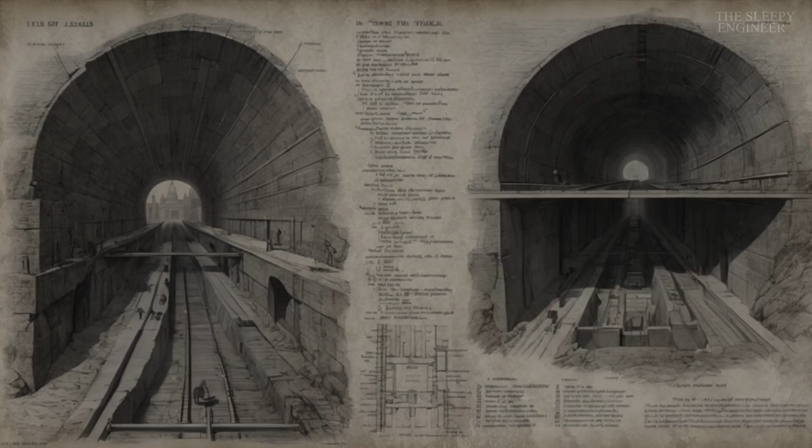the darkness below. The entire weight of our civilization, its commerce, its culture, its crushing physical mass, rests upon a hidden, horizontal world, an immense and intricate subterranean landscape that is arguably the single greatest and least understood engineering marvel of the modern age. This is the story of that world, the story of how we build the impossible passages that are the true arteries of the metropolis.

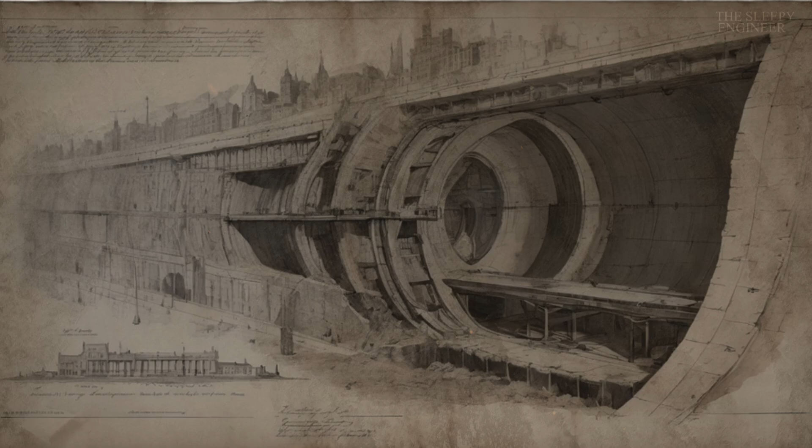The very ground beneath your feet is not the solid, dependable constant you imagine it to be. It is a membrane, a thin, carefully engineered skin, separating the chaotic life of the surface from the silent, high-pressure world of the deep earth. Through this membrane, we have threaded a network of passages of almost unimaginable scale and complexity. While you work in an office tower, a river of steel, a subway train carrying 1,000 people, may be gliding silently through the bedrock 100 meters below.

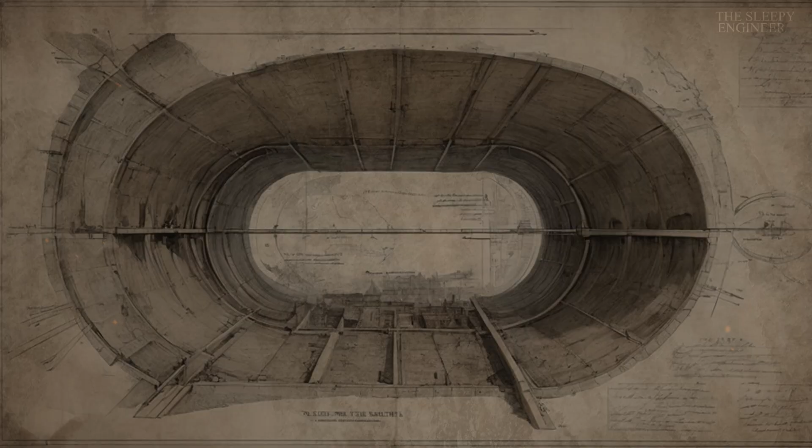While you sleep in your bed, a torrent of fresh water, the lifeblood of millions, is rushing through a concrete vessel wide enough to drive a truck through, its path charted through the earth with millimeter precision. We live our lives on the surface of a drum, blissfully unaware of the profound and thunderous work that is required to keep it from collapsing.

This is an exploration of how that work is done, not with magic, but with mathematics, geology, hydraulics, and brute mechanical force on a scale that borders on the unbelievable. We will journey down past the familiar layers of asphalt and concrete and into the earth itself, to understand the science, the risks, and the sheer audacity of modern urban tunneling.

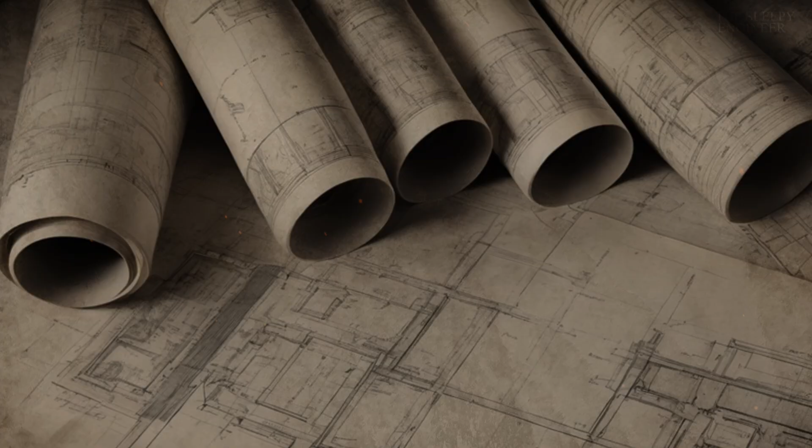Our descent does not begin in soft earth, but in a dense, man-made archaeology. The first few dozen meters beneath any major city are not a natural geology, but a chaotic landfill of its own history. Here lie the ghosts of forgotten infrastructure, crumbling brick sewers from the Victorian era, abandoned pneumatic mail tubes, stone foundations of buildings that no longer exist, and a tangled, uncharted web of old pipes and cables laid down by generations who kept poor records.

This is the first great challenge. Before a modern tunnel can even begin its journey, its path must be cleared through this treacherous historical debris. It is a painstaking process of mapping the unknown, of using ground-penetrating radar and carefully drilled boreholes to create a three-dimensional image of the unseen obstacles. It is less like construction and more like performing a delicate, high-stakes surgery on the city's past.

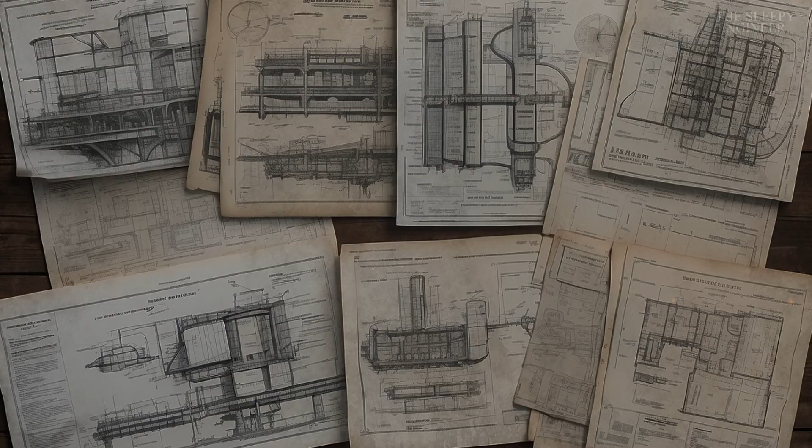Deeper still, we leave the realm of human history and enter the realm of geological time. Here, the challenges are more fundamental and far more powerful. The ground is not a uniform homogeneous substance. It is a complex layer cake of different materials, each with its own unique and often malevolent personality. There are layers of soft, waterlogged sand waiting to liquefy and flow into any new opening with the force of a tidal wave. There are pockets of hard, abrasive granite, capable of grinding the most powerful steel cutting tools into dust. And there are beds of stubborn, sticky clay, which can clog and suffocate even the most advanced digging machines.

Most dangerous of all is the water. The earth is saturated with it, and this groundwater is often under immense pressure. The single greatest fear of the tunneler is a breach, an uncontrolled inflow of water and earth that can lead to catastrophic collapse, not only of the tunnel itself, but of the very surface of the city above.

To conquer this high-pressure, unpredictable, and completely invisible world, we have conceived and built one of the most extraordinary machines on the planet. It is not merely a digger, it is a self-contained subterranean starship, a mobile factory designed to navigate the hostile environment of the deep Earth. This is the tunnel boring machine, the TBM.

Its scale is difficult to comprehend. A machine that can be over 150 meters long, weighing in excess of 4,000 tons. At its front is the cutter head, a massive rotating steel disc, bespoke for the geology it will encounter, armed with an array of hardened steel discs and tungsten carbide scrapers that spin with enough torque to pulverize solid rock into something that can be transported.

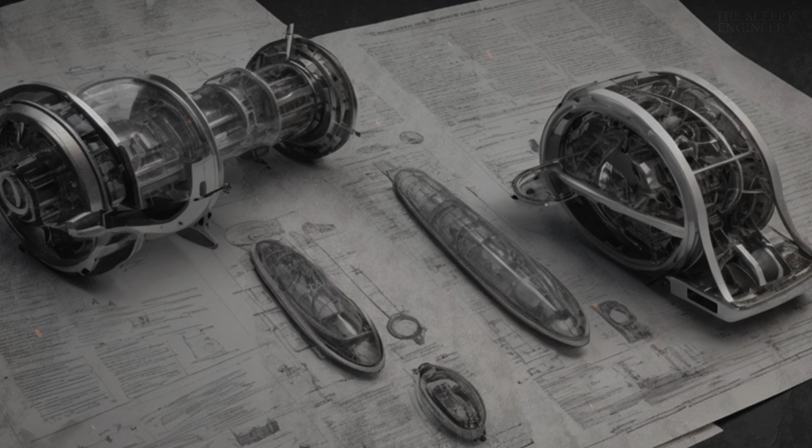They pore over historical photographs, searching for visual clues of a forgotten quarry or an old industrial waste site that was filled in and built over 100 years ago, now existing as a hidden pocket of soft, unpredictable, and potentially toxic material. Every piece of information, no matter how obscure, is a vital clue. Another small pinprick of light in the immense darkness of the unknown. They are building a case file on the Earth, cross-examining its history to understand its present-day temperament.

Once this historical tapestry has been woven, the physical investigation begins, often in the dead of night to avoid disrupting the city's rhythm. Small, unassuming drilling rigs are brought onto the streets and sidewalks along the proposed tunnel route. From these positions, they begin to pierce the veil, drilling a series of boreholes deep into the ground. These are not just holes, they are precise surgical incisions designed to extract physical evidence.

As the drill advances, it brings to the surface long cylindrical cores of soil and rock, perfect cross-sections of the subterranean world. To the trained eye of a geologist, these cores are like a library of deep time. They reveal the story of the Earth in vivid, tactile detail. The sharp, clear line separating a layer of dense, reddish clay from a stratum of pale, fine-grained sand. The cool, solid heft of a piece of granite, its crystals glittering under the work lights. The damp, musty smell of earth that has not been touched by air for millennia.

Each core is meticulously logged, photographed, and sealed in protective tubes, its exact depth and location recorded with GPS precision. Dozens, sometimes hundreds of these boreholes are drilled, each one a vital data point in the slow and patient process of mapping the abyss. These extracted cores are then transported to a geotechnical laboratory, a place where the Earth itself

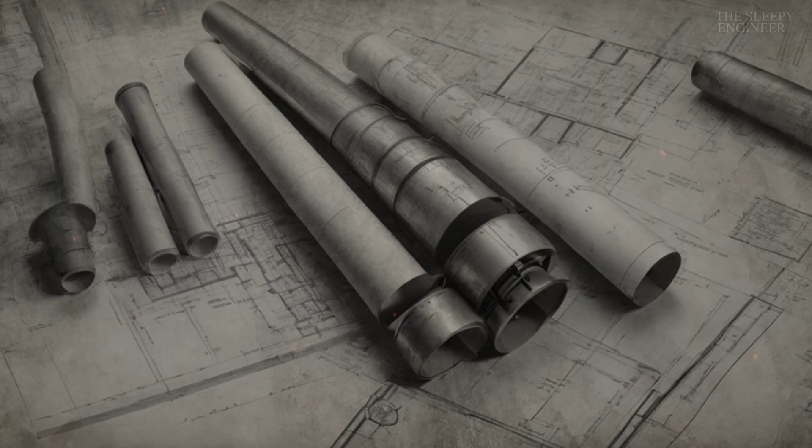Soil samples are analyzed for their particle size, their plasticity, and their moisture content, which dictates how they will behave when excavated. Will they be stable, or will they flow like liquid? Other samples are subjected to permeability tests, where water is forced through them under pressure to determine how easily the groundwater will be able to invade the tunnel.

The abrasiveness of the sand and rock is measured to predict how quickly the brutally expensive steel cutters on the TBM will be worn down and need replacement. Even the chemistry of the groundwater is analyzed to check for corrosive sulfates or chlorides that could, over the span of a century, eat away at the concrete and steel of the finished tunnel lining.

While the boreholes provide deep, vertical snapshots of the ground, the spaces between them remain a mystery. To fill in these gaps, engineers deploy a range of sophisticated, non-invasive techniques, a field known as geophysics. They conduct seismic surveys, laying out lines of sensitive microphones on the surface and then creating a small controlled vibration, often from a specialized heavy truck.

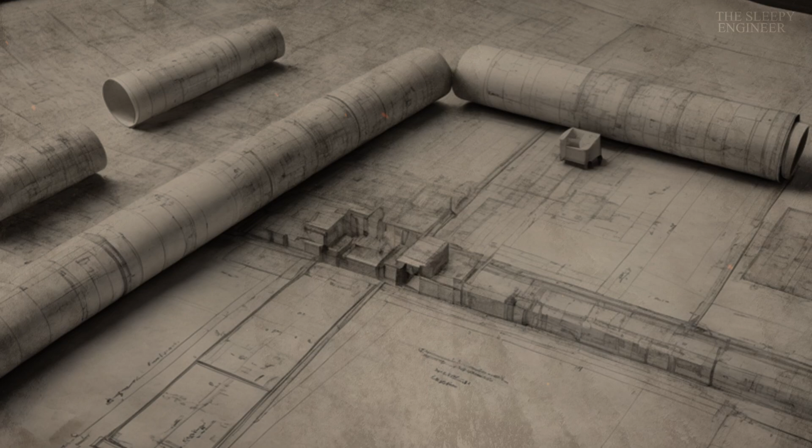By measuring the time it takes for these sound waves to travel down, reflect off different geological layers, and return to the surface, they can create a blurry but continuous ultrasound image of the rock strata. They use electrical resistivity, passing a current through the ground between two probes. Since water-saturated soil conducts electricity far better than solid, dry rock, this method allows them to map out the location of potentially dangerous underground aquifers and water pockets.

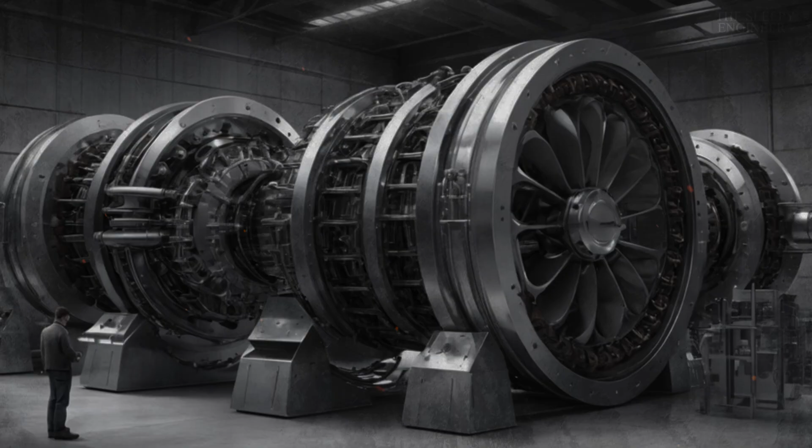This combination of high-tech remote sensing, akin to giving the city a CT scan, allows the engineers to build a more complete, holistic picture of the challenges that lie in wait, turning a series of disconnected data points from the boreholes into a coherent and continuous map. The final result of this long and multifaceted investigation is the creation of a ground model, a comprehensive, three-dimensional digital twin of the subterranean world through which the tunnel will pass.

All of the disparate data streams, the historical maps, the hundreds of borehole logs, the thousands of laboratory test results, and the geophysical surveys are fed into powerful computer software. The result is a stunningly complex and detailed virtual reality, a block of the Earth that engineers can digitally fly through, examining every layer of rock, every pocket of sand, and every potential water hazard from any angle.

They can use this model to run simulations, predicting how the ground will shift and settle as the tunnel is excavated, a phenomenon measured in millimeters that can have a profound impact on the buildings on the surface. This digital model is the single most important document in the entire project. It is the tunneler's Bible, the grand strategy map that will dictate every major decision to come. It transforms the unknown hostile abyss into a known, quantifiable, and ultimately conquerable environment.

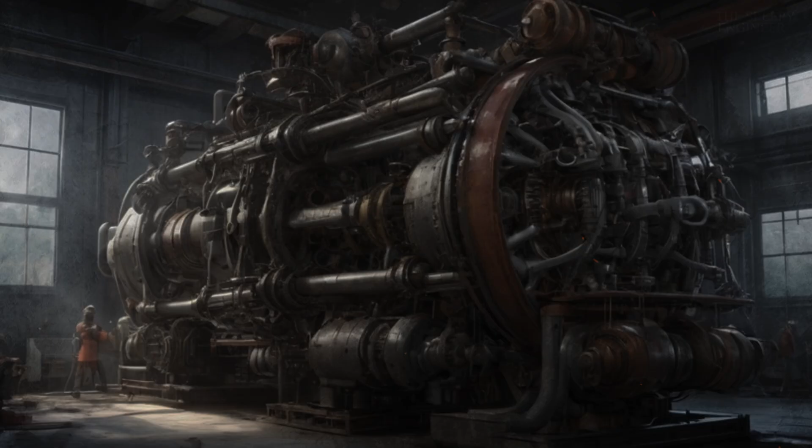In other cases, they may use grouting, a process where a specially formulated concrete-like slurry or a chemical resin is injected into the soil under high pressure, filling the voids between the grains of sand and soil, and effectively turning the weak ground into a solid, stable mass. This is engineering at its most elemental, the power to transform the earth to suit our needs.

With the invisible battlefield now fully charted, its hidden dangers exposed, and its weakest points artificially strengthened, the silent war of intelligence is over. The stage is now set for the first great act of physical creation to begin. The plans are finalized. The path is clear. But this first act is not the boring of the tunnel itself. It is the construction of its birthplace.

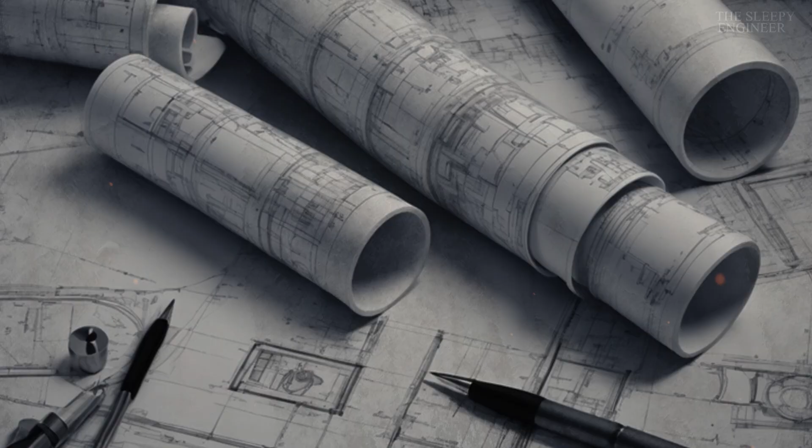A colossal reinforced concrete cavern must be excavated deep within the earth, right in the heart of the city, to serve as the assembly chamber and launch pad for the tunnel boring machine. This structure is the portal, the gateway to the deep earth, and it presents its own immense challenge. How do you dig a hole the size of a small cathedral in the middle of a congested metropolis, surrounded by skyscrapers and saturated with groundwater, without everything on the surface caving in?

The answer to how you dig a hole the size of a cathedral in the heart of a city is one of the most elegant and counterintuitive truths in all of modern engineering. You do not dig a hole at all. To simply excavate a vast open pit in the soft, saturated, and unstable ground of an urban center would be to invite immediate and catastrophic collapse. The immense, unseen pressure of the surrounding earth and water would surge into the void, undermining the foundations of nearby skyscrapers and turning the streets above into sinkholes.

Instead, the problem must be approached with the meticulous foresight of a grandmaster playing chess. The walls of the great cavern must be built first, materialized deep within the earth as if by magic, forming a fortress against the planet's pressure before a single significant shovel of soil from within that fortress is ever removed. This is the great secret of urban excavation. To conquer the void, you must first construct its cage.

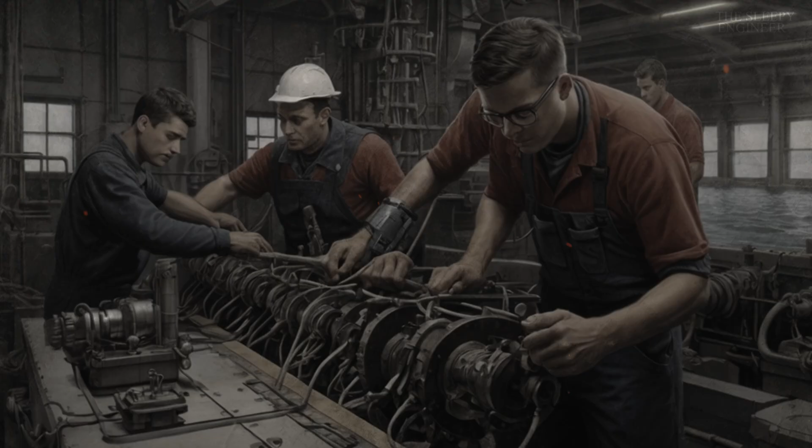Teams of specialized surgeons of the street must carefully excavate, cut, and divert massive water mains, high-pressure gas lines, critical sewer trunks, and the fragile, indispensable bundles of fiber optic cables. Each one of these systems must be rerouted around the perimeter of the future launch box, a process akin to performing a complex bypass surgery on a living patient, all while ensuring that the city's circulation is never interrupted.

Simultaneously, the site is armored for the immense construction to come. Acoustic barriers are erected to shield the surrounding neighborhoods from the noise, and sophisticated dust suppression and water treatment systems are installed. This is the slow, unglamorous, but absolutely vital prelude to the main event, ensuring the city can continue to function completely unaware of the immense operation being staged in its midst.

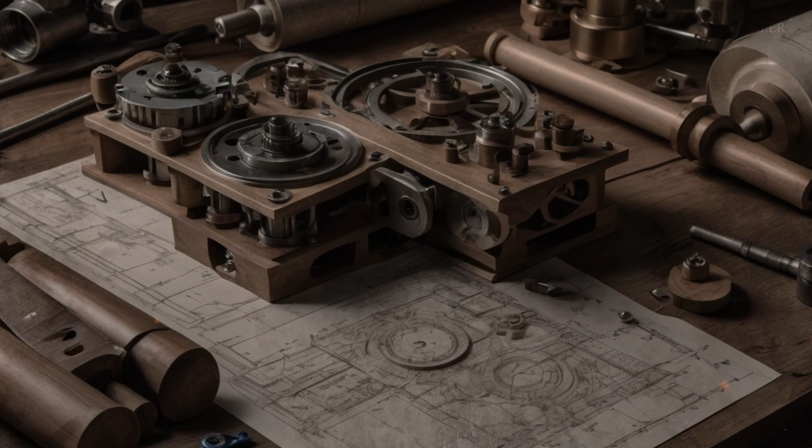With the site prepared, the construction of the unseen walls begins, often using a remarkable method known as diaphragm wall construction. Imagine a deep, narrow trench, perhaps only a meter or two wide, but plunging 50 or 60 meters into the earth. This trench is excavated not all at once, but in a sequence of discrete rectangular panels using a colossal, heavy-jawed mechanical grab called a clamshell. As this machine slowly and powerfully bites its way into the ground, the trench it creates is not left open to the air, where it would immediately collapse.

Instead, it is kept completely filled at all times with a thick, heavy, and viscous slurry made from a special volcanic clay called bentonite. The immense weight and density of this muddy fluid exerts a constant outward pressure on the trench walls, perfectly counteracting the inward pressure of the surrounding soil and groundwater, holding the excavation open with its sheer hydrostatic force.

Once a single panel is excavated to its full staggering depth, an immense cage-like skeleton of prefabricated steel reinforcement, weighing many tons, is lifted by a crane and slowly, carefully lowered into the bentonite-filled trench, sinking through the thick fluid until it is in its final position.

The final step in creating a single wall panel is an act of alchemical transformation. A long vertical pipe, known as a tremie pipe, is lowered to the very bottom of the slurry-filled trench inside the steel cage. Then, a specially designed high-strength concrete is pumped down this pipe. As the concrete begins to fill the trench from the bottom up, its immense density and weight displaces the lighter bentonite slurry, which is pumped out from the top and saved for reuse. This process continues for hours.

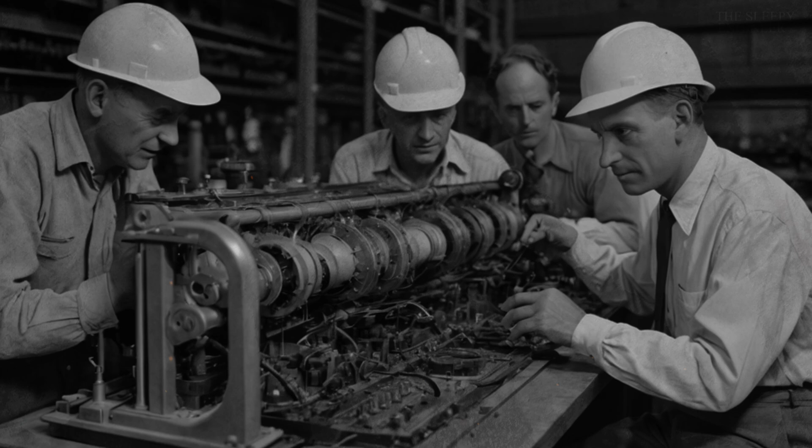These struts, some as thick as a person's torso, are themselves supported by horizontal steel beams called walers that run along the length of the wall. As the pit deepens, a dense, crisscrossing lattice of these enormous steel beams is installed, transforming the growing cavern into a stunning cathedral-like space of immense scale and complexity, a testament to the colossal, invisible forces being held at bay.

As the excavation plunges below the natural water table of the city, the battle against water begins in earnest. The completed walls are watertight, but the ground at the bottom of the pit is not. Water begins to seep up from below, under immense hydrostatic pressure. To combat this, a powerful dewatering system is engaged, a network of deep wells and pumps that constantly work to draw down the local water table, keeping the vast construction site remarkably dry.

Once the excavation reaches its final planned depth, the last major structural element is created, the base slab. This is the floor of the launch chamber, a massive solid slab of steel reinforced concrete, often many meters thick. This base slab must not only be strong enough to support the weight of the multi-thousand-ton tunnel boring machine, but it must also be heavy enough to resist the constant, buoyant uplift pressure from the groundwater below, which is perpetually trying to push the entire concrete box up out of the ground, as if it were a boat.

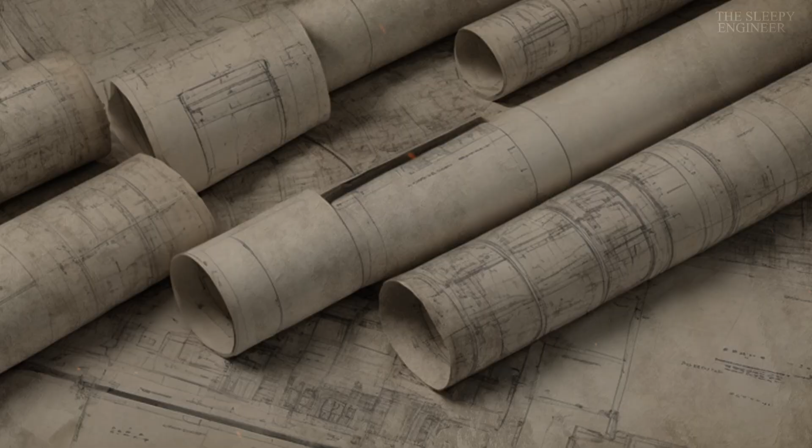When this final element is cured, the work is complete. Hidden deep beneath the traffic, the noise and the life of the city is a new and permanent place, a vast, silent, and cavernous concrete hall. It is a dry, secure, and structurally perfect environment, a pristine industrial cathedral, hundreds of meters long and dozens of meters deep, equipped with massive overhead gantry cranes that run along its length.

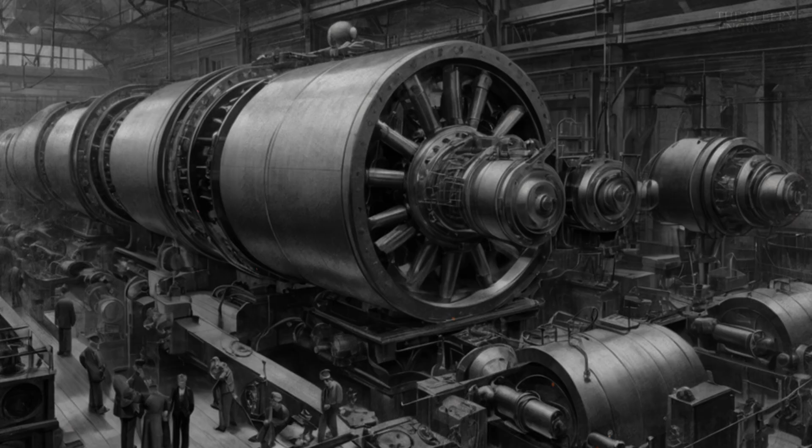It is the largest, most expensive, and most complex empty room in the entire city, and its sole purpose is to serve as a clean room, an assembly hall, and a launch pad for the Titan that is to come. The great void has been successfully carved from the heart of the city. The surgical theater is now prepped, scrubbed, and ready for the main operation. All that is missing is the star of the show.

The great concrete cathedral now lies waiting, a silent, empty space of immense potential, hidden from the world above. But its star, the tunnel boring machine, is not a single entity that arrives on a truck.

It is a colossal and incredibly complex machine that is forged in dozens of factories in different countries around the world, and which will arrive at the site in hundreds of individual pieces. The cutter head alone, a single disc of steel, can weigh over 100 tons. The main bearing, the component that allows the cutter head to rotate, is itself a masterpiece of precision engineering the size of a small house.

How then do you choreograph the complex logistical ballet of delivering these massive multi-ton components through the congested streets of a modern city? Lower them one by one into the deep earth with the delicate precision of a watchmaker, and assemble them in the correct sequence to create the single largest and most powerful mobile machine on the planet.

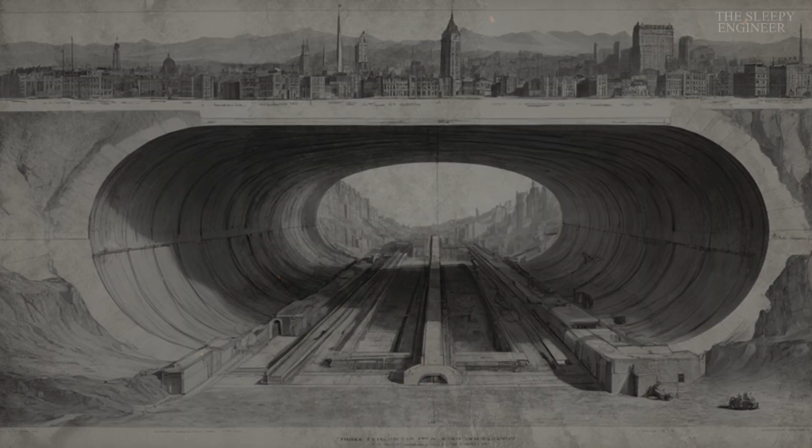This process is repeated hundreds of times, a slow and deliberate population of the void, each lift a potential point of catastrophic failure, each successful placement a small but crucial victory in the assembly of the giant. Down in the concrete quiet of the assembly chamber, the beast begins to take shape, and its assembly always begins with its heart and its skeleton.

The first pieces to be assembled are the curved, immensely thick steel plates of the main shield, the cylindrical body that will protect the machine and its crew from the crushing pressures of the earth. These sections are lowered, carefully aligned, and then joined together with hundreds of massive, high-strength bolts, torqued to a precise specification, to form the first solid rings of the TBM's body.

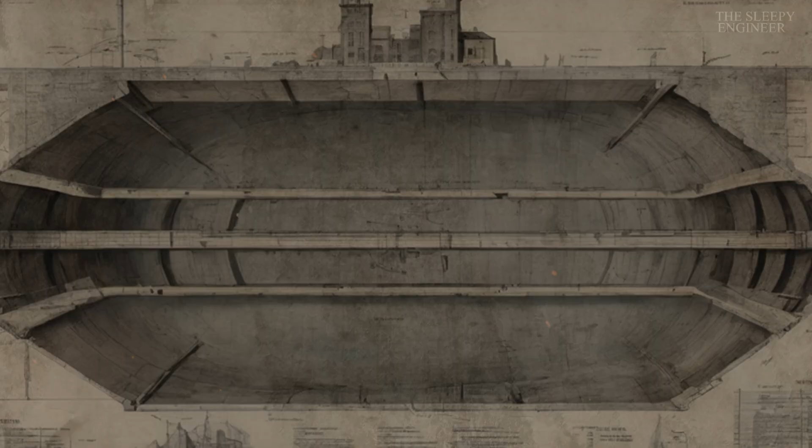Once this foundational structure is in place, the single most important, most expensive, and most precise component of the entire machine is installed: the main bearing. This is a colossal ring of perfectly machined steel, a masterpiece of metallurgy that can be 10 meters in diameter and weigh hundreds of tons. It is the heart of the machine, the component that will allow the cutter head to rotate against the immense resistance of the rock while bearing the full forward thrust of the entire machine.

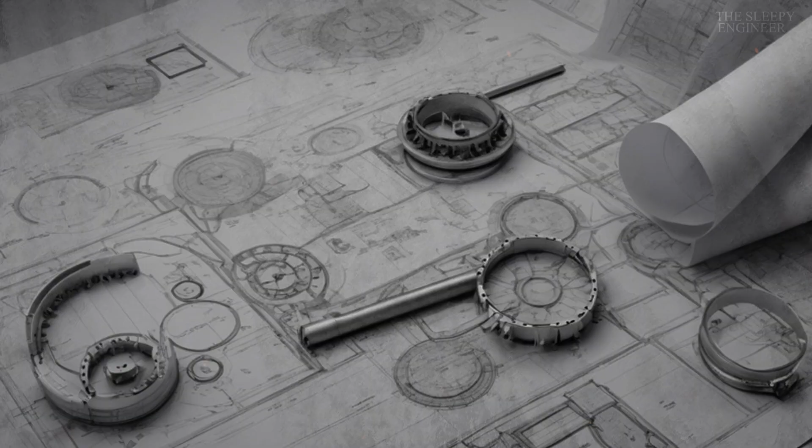Its installation is the most delicate and painstaking part of the entire assembly, a process that can take weeks, as it must be aligned with a degree of precision that is almost absolute, for any flaw in its placement would be magnified into a catastrophic failure once the machine begins to bore.

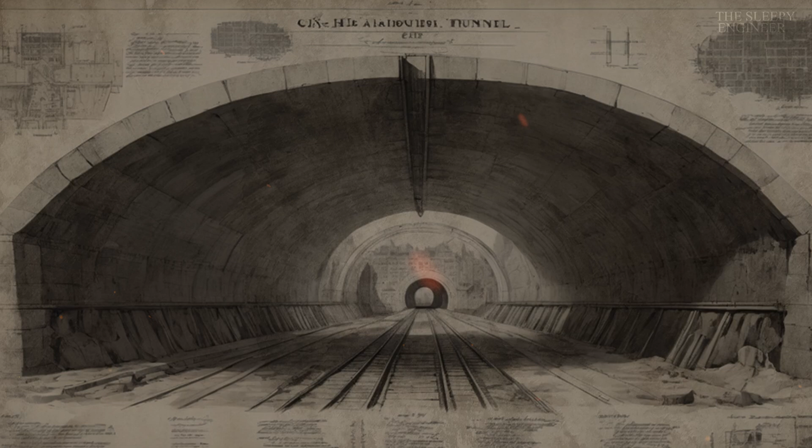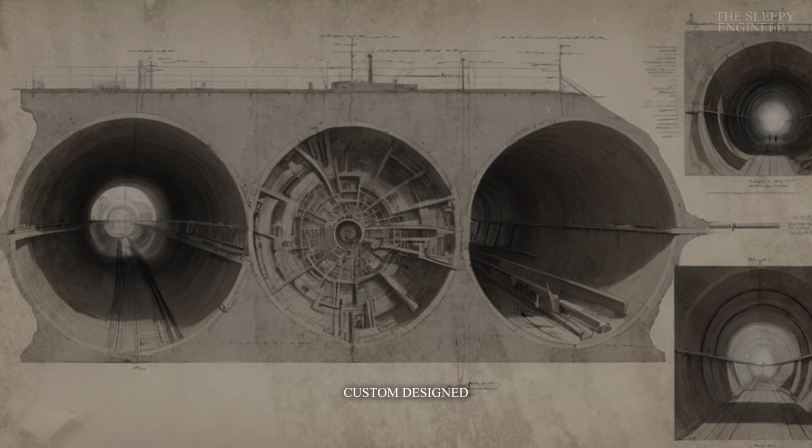With the heart of the Titan securely in place, the time comes to give the machine its face. The cutter head, the business end of the TBM, is often the last major component to be assembled on the surface, before being lowered into the pit. This massive steel disc, which has been custom designed for the specific geology of its journey, is laid out and its tools are installed. Dozens, sometimes hundreds of cutting instruments are meticulously bolted into place.

These include heavy, hardened steel disc cutters, designed to create high-pressure point loads that crack and fracture solid rock, and softer tungsten carbide scrapers and plows, designed to scoop away softer ground like clay and sand. When this immense armored disc is fully dressed, it is lifted and carefully rotated into a vertical position. Then, in the most dramatic moment of the assembly, the entire multi-hundred-ton cutter head is lowered into the launch chamber and painstakingly bolted onto the main bearing.

This is the moment of transformation. The collection of rings, motors, and hydraulic rams ceases to be a collection of parts and becomes a recognizable entity. A machine with a face, a purpose-built monster designed for a singular, relentless task: to consume the earth. A tunnel boring machine, however, is far more than just a rotating drill bit. It is a dense, complex, and self-contained ecosystem. And now its internal organs must be installed.

Deep within the protection of the main shield, a labyrinth of machinery is assembled. A ring of colossal electric motors, each the size of a small car, is installed and connected to the gearboxes that will drive the cutter head. The immense hydraulic power pack is put in place, a system of pumps and reservoirs that will power the rams that propel the machine forward, and the segment erector that builds the tunnel. The screw conveyor is installed, a massive Archimedes screw that sits directly behind the cutter head, designed to catch the excavated rock and soil, or muck, and transport it through the machine to the waiting disposal system.

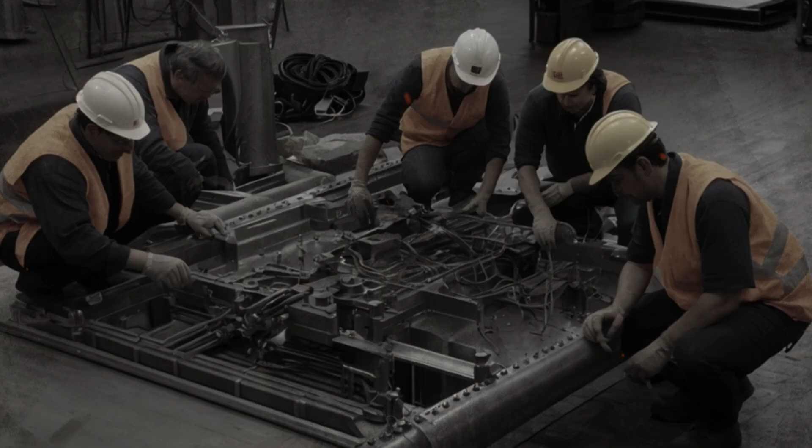This critical process, known as traversing the shaft, is one of the most difficult and skill-intensive tasks in all of tunnel surveying. The survey crew must transfer the coordinates of the surface control points down the immense vertical drop of the launch shaft with almost no loss of accuracy. They achieve this using a combination of techniques, often employing highly precise optical plummets or vertical lasers to project a perfectly straight line of sight from a known point at the top of the shaft to a new point being established on the floor of the launch chamber below.

This process is fraught with potential errors. The subtle movement of the air within the shaft, caused by temperature differences and ventilation systems, can bend the path of a laser beam. The slightest vibration in the surrounding ground can disturb the instruments. The surveyors must account for all of this, taking dozens of repeated measurements and using complex mathematical adjustments to establish a new set of control points deep in the Earth that are a true and perfect reflection of the network on the surface. Once this control network is established within the tunnel's starting chamber, the machine itself can be given its own set of eyes.

Mounted deep within the forward section of the TBM's shield is its primary guidance system, a sophisticated laser-based instrument known as an automatic tail shield laser system. At its heart is a robotic total station, a device that can automatically track and measure distances and angles with incredible speed and accuracy. This total station is aimed not forwards, but backwards, into the tunnel that has already been built. As the TBM moves, the total station continuously and automatically locks onto a series of reflective prism targets, which have been mounted at precise locations on the newly installed concrete tunnel rings.

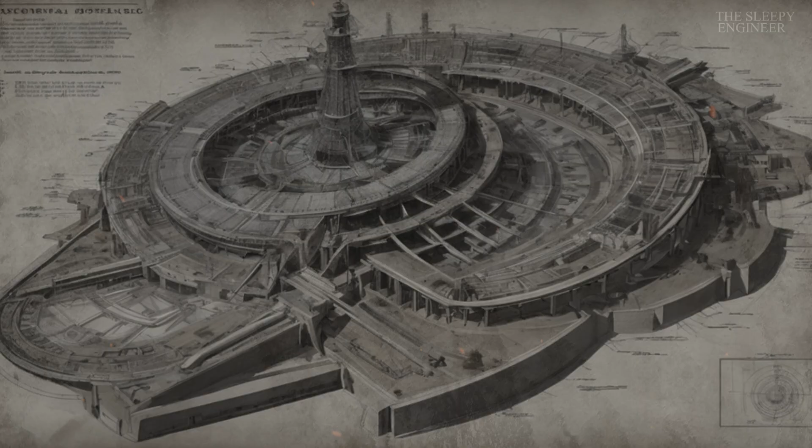The empty tube must then be given its organs, its nervous system, and its purpose. This is the final and most complex phase of the construction. For a subway tunnel, this involves the painstaking installation of the track bed, the laying of thousands of tons of ballast, concrete sleepers, and the two parallel ribbons of steel rail, all set to a precise and unforgiving geometry. For a road tunnel, this is when the road surface itself is paved, the curbs are installed, and the lane markings are painted. Then comes the vast and intricate web of mechanical and electrical systems.

Thousands of kilometers of high voltage cables are run to power the lighting, the signaling systems, and the ventilation fans. The ventilation system itself, with its colossal jet fans mounted to the tunnel ceiling, is installed to manage the flow of air and the exhaust from vehicles.

And finally, the critical life safety systems are put in place. The emergency walkways, the fire suppression pipelines, the communication systems, and the thousands of sensors that will monitor the tunnel's health for its entire operational life.

The single-bore tunnel, a perfect and pristine cylinder carved by a titan of steel and guided by an invisible web of lasers, is now a complete and functioning masterpiece of modern engineering. It is a testament to a process that is both brutally powerful and exquisitely precise.

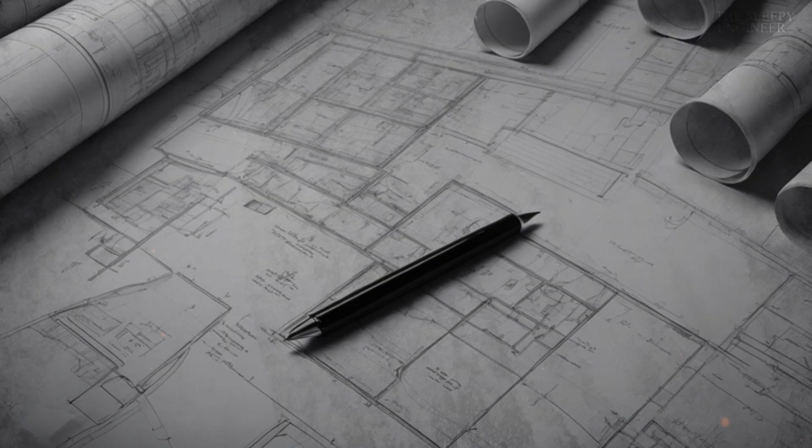A vast cavern is never excavated all at once. It is revealed in a careful and predetermined sequence of smaller excavations. The process typically begins at the very top, or the crown of the future cavern, with the excavation of what is known as the top heading. In softer ground, this is done with a roadheader, a powerful excavating machine with a large rotating cutting head, studded with tungsten carbide picks, which selectively grinds away the earth.

In hard rock, this is achieved through the precise and controlled use of explosives, a technique known as drill and blast, where a carefully calculated pattern of charges is used to break up a limited section of the rock face. The key to this first step is that only a small, manageable portion of the tunnel face is excavated at a time, typically for a length of only a single meter. This minimizes the area of unsupported ground, ensuring the natural stability of the rock arch is never compromised.

Immediately following this initial cut, and this is the most critical and time-sensitive step in the entire cycle, the newly exposed earth is given an artificial skin, before the ground has a chance to unravel or deform uncontrollably. A thin layer of a special, fast-setting, and high-strength concrete mixture called shotcrete is applied.

This is not concrete that is poured into forms. It is a dry or wet mix that is propelled at high velocity from a nozzle, directly onto the raw, contoured surface of the newly excavated rock and soil. This process, often carried out by a skilled operator guiding a robotic spraying arm, creates a thin, flexible, but remarkably strong initial lining that conforms perfectly to every nook and cranny of the excavation.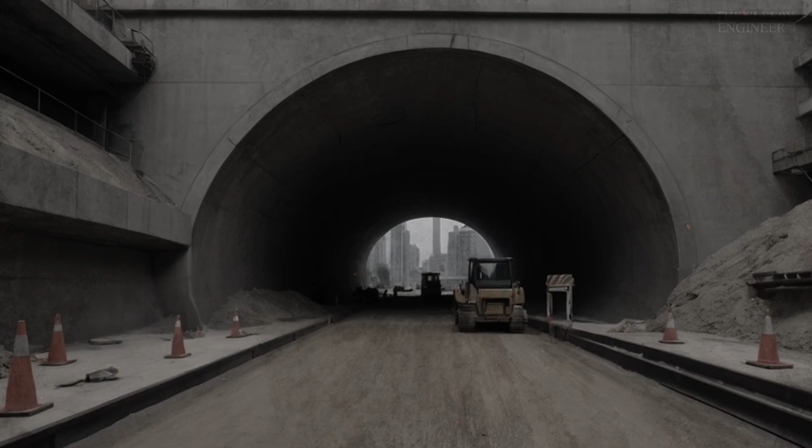Extensometers are placed in boreholes to measure, with microscopic accuracy, how much the different layers of rock are moving. Pressure cells are embedded in the shotcrete lining to measure the buildup of stress and load, and convergence bolts are installed across the tunnel, with their distance from each other being measured constantly by surveyors to determine how the cavern is deforming as a whole.

The data from these thousands of sensors is fed back to the engineering office on the surface and monitored 24 hours a day. This constant stream of information allows the engineers to listen to the ground to understand if it is behaving as their models predicted. If the ground is showing more stress or movement than expected, the support system can be adapted on the fly. The next layer of shotcrete can be made thicker, or the pattern of rock bolts can be made denser. This makes NATM a living, adaptive method, a true partnership between the engineer and the geology.

Only after the entire cavern has been fully excavated and the primary lining of shotcrete and rock bolts is deemed to be completely stable does the final stage of construction begin. The primary lining, though structurally sound, is a rough, uneven surface, and it is not designed to be perfectly waterproof. To create the final permanent structure, a comprehensive waterproofing membrane is meticulously installed.

This is a thick, durable, and flexible skin of a material like PVC, which is carefully welded and sealed to cover every square meter of the cavern's interior, creating an impermeable barrier that will prevent any groundwater from ever entering the station. Once this membrane is in place, the final, reinforced concrete inner lining is constructed.

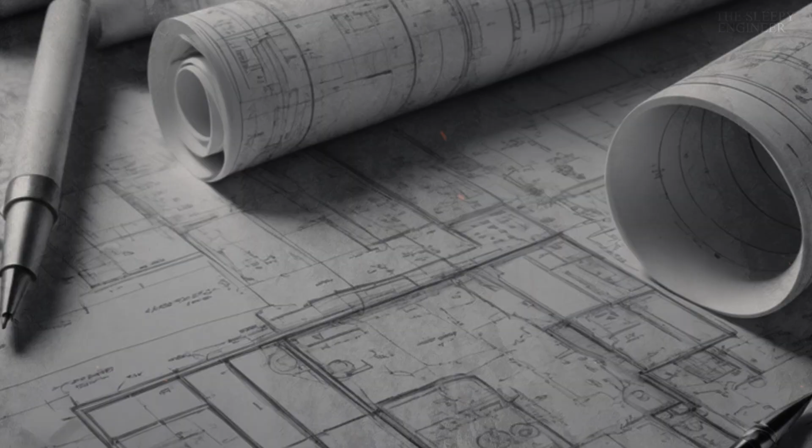This is the thick, smooth, and often architecturally expressive concrete shell that the public will ultimately see. This final lining is not just for aesthetics. It is the permanent, structural heart of the cavern, designed to be completely watertight and to bear the loads of the earth for well over a century.

The Great Sculpted Cavern, a bespoke space born from a harmonious and observational dance with the earth, is now complete. The new Austrian tunneling method has allowed engineers to create a complex, multi-level void, a feat of subterranean architecture that the relentless cylindrical march of the TBM could never hope to achieve.

But these two great philosophies of tunneling, the brute force shielded advance of the TBM and the delicate adaptive approach of NATM, are not always mutually exclusive, and neither can function without confronting one of the oldest, most powerful, and most unpredictable enemies of the deep earth, water.

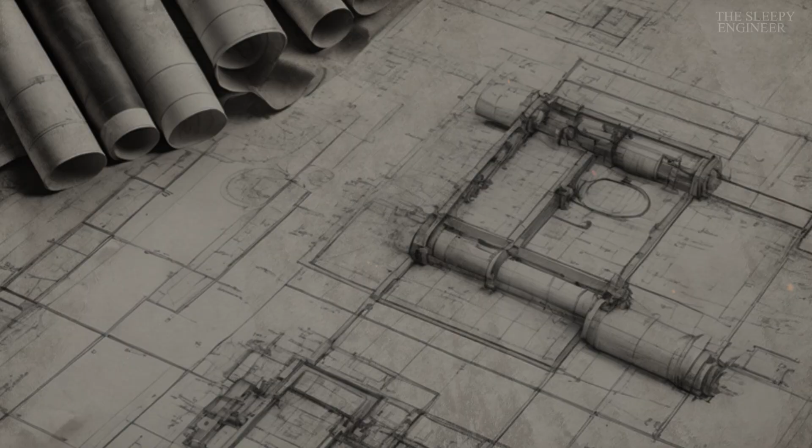What happens then, when the path of a tunnel must pass not just through damp soil, but directly beneath a massive flowing river, or even the open sea? How do we build dry, stable passages on the bed of a harbor, fighting against colossal hydrostatic pressures that threaten to crush, breach, and flood any structure in an instant? This requires moving beyond boring and sculpting into a world where tunnels are not dug but are built on the surface, and then deliberately and precisely sunk.

We have witnessed the relentless, forward-boring march of the shielded Titan, and the patient, sculptural craft of the observational method. Both are philosophies designed to conquer the solid earth, but we now arrive at a challenge of a different order of magnitude, an adversary that cannot be simply drilled through or sculpted away, a wide, deep, and powerful body of water.

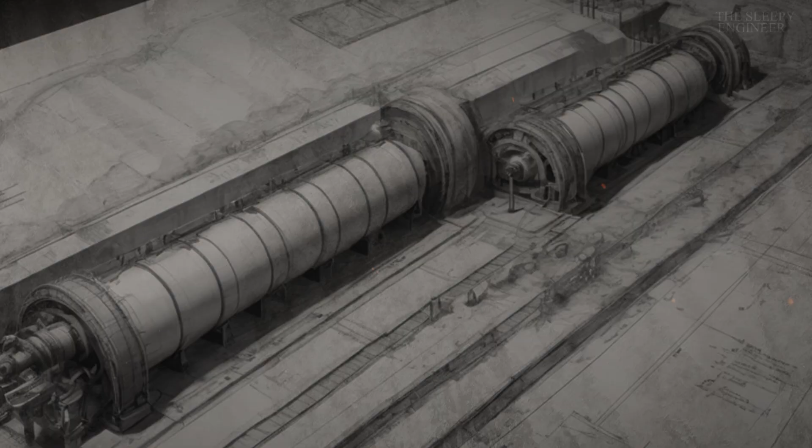When the path of a tunnel must cross a major river, a busy harbor, or a coastal strait, the geology of the seabed is often a treacherous mixture of soft, unconsolidated silts, muds, and waterlogged sands, often extending to immense depths. To drive a conventional TBM through such ground would be a perilous and astronomically expensive undertaking, fighting a constant high-pressure battle against mud and water.

To solve this seemingly insurmountable problem, engineers devised a solution of breathtaking audacity and lateral thinking. They conceived of a method that does not bore through the ground at all. Instead, it is a hybrid of naval architecture and heavy civil engineering, a method where the tunnel is not dug but is built, floated, and then deliberately and with immense precision sunk. This is the world of the immersed tube tunnel.

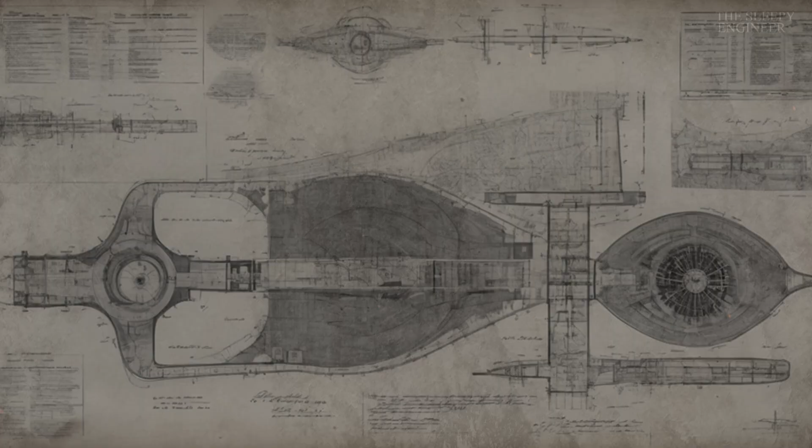The life of an immersed tube tunnel begins not in the water, but in a vast, purpose-built factory on dry land. This is the casting basin, or dry dock, an immense construction site, often located many kilometers from the tunnel's final destination, where the individual elements of the tunnel are forged. These are not small pieces. A single tunnel segment can be over 100 meters long, 30 or 40 meters wide, and 10 meters high, a colossal hollow box of heavily reinforced concrete or dual-walled steel, weighing as much as 50 or 60,000 tons.

Inside this dry dock, a factory-like assembly line is established to construct these behemoths. Immense movable formworks are erected, and a complex web of steel reinforcement is meticulously tied into place. Then, in a series of massive continuous pours, thousands of cubic meters of high-strength concrete are cast to form the segment's floor, walls, and roof.

At each end of these colossal concrete boxes, a critical feature is installed: a massive compressible rubber seal, known as a Gina gasket, and a temporary but immensely strong steel bulkhead that will, for a time, turn this piece of a tunnel into a seaworthy vessel.

When a series of these colossal segments is fully constructed and cured, the most dramatic and counterintuitive phase of their creation begins: the dry dock. A workplace that has been a hive of terrestrial construction activity for many months is prepared to be flooded. The massive sea gates that separate the casting basin from the adjacent river or harbor are sealed, and immense pumps are slowly switched on, filling the basin with millions of gallons of water. With agonizing slowness, the water level begins to rise.

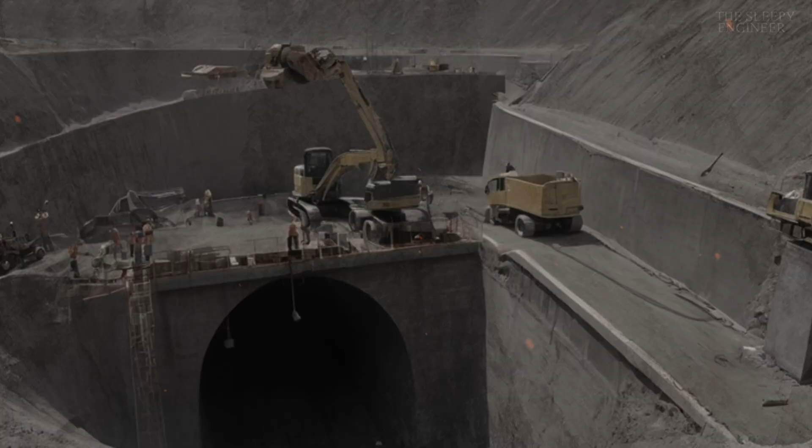The tunnel segments, each as massive as a naval destroyer, are now floating, transformed from static structures into immense rectangular and strangely graceful vessels, waiting in their temporary lagoon for the next stage of their journey. That journey is a slow and majestic procession, a carefully choreographed naval operation.

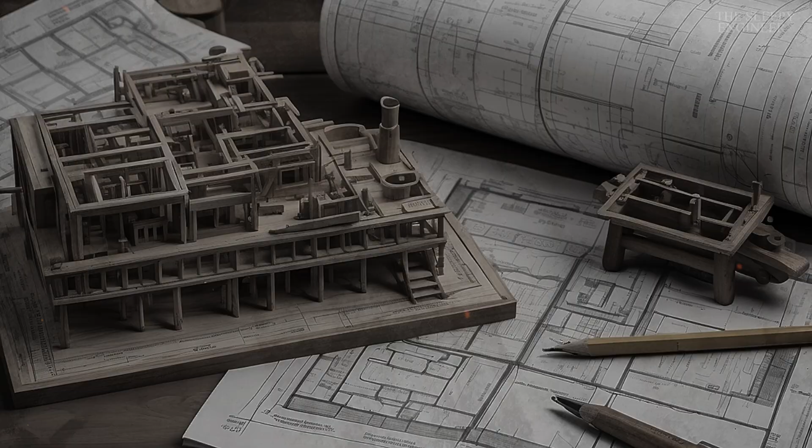A flotilla of powerful tugboats enters the now flooded dry dock and is carefully secured to a single floating tunnel segment. Then, the sea gates are opened and the segment is gently nudged out into the open waterway. The process of towing this immense, unwieldy, and almost shapeless object to the final tunnel site is a painstaking exercise in navigation and seamanship. The segment has a huge surface area, making it vulnerable to winds, tides, and river currents.

The tugboat captains must work in perfect concert, their movements guided by a central command and a constant stream of data from GPS positioning systems and weather reports. For the people on the shore, it is a bizarre and stunning spectacle. A massive, featureless block of what appears to be a sunken building, floating serenely on the surface of the water, on a journey to its final, invisible resting place.

While the tunnel segments are being fabricated and transported, a parallel and equally massive operation is taking place at the bottom of the river. A fleet of specialized dredging vessels begins the task of preparing the tunnel's bed. These are often powerful cutter suction dredgers, which use a rotating saw-like head to break up the silts and clays of the riverbed, and a powerful centrifugal pump to suck the material up and pipe it away.

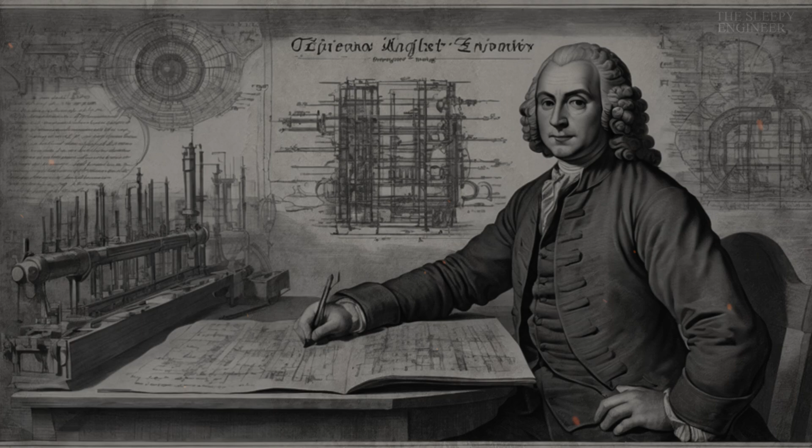Following the precise, predetermined alignment of the tunnel, these machines excavate a wide and deep trench in the river floor. This trench must be perfectly graded and shaped to accommodate the tunnel segments. Once the trench is excavated, a final, critical layer of preparation begins. A specialized vessel, known as a fall pipe vessel, moves over the trench, using a long, articulated pipe guided by GPS and sonar.

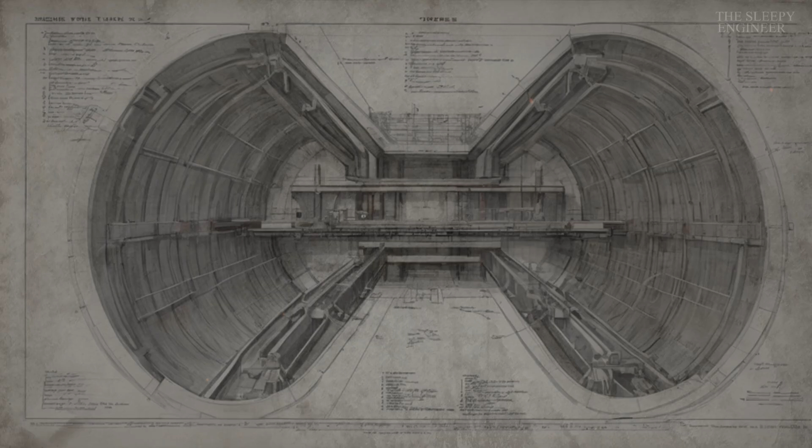It deposits a perfectly smooth and level foundation course of crushed gravel or stone at the bottom of the dredged channel. This gravel bed is the foundation upon which the entire tunnel will rest, and its placement must be accurate to within a few centimeters. With the trench prepared and a tunnel segment now floating and moored in position above it, the single most tense and critical moment of the entire process arrives: the controlled sinking.

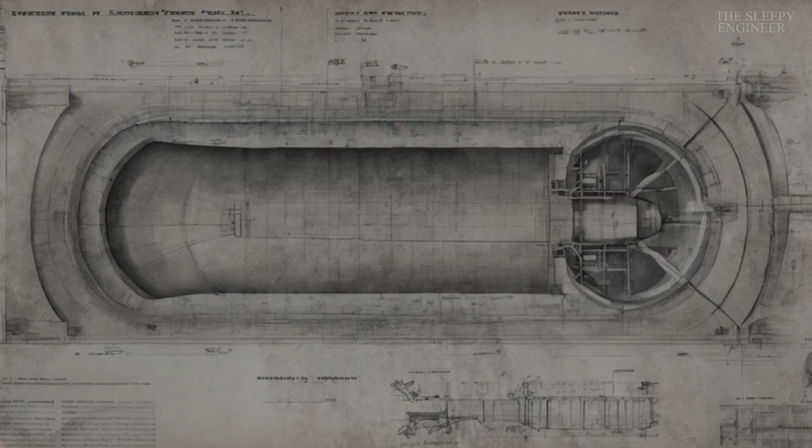The segment is maneuvered into a large floating steel structure known as a sinking rig, which is anchored with immense precision directly over the trench. The process of descent begins by slowly pumping thousands of tons of water into large ballast tanks that were cast into the segment's concrete structure. As the weight of this ballast water overcomes the segment's natural buoyancy, it begins to sink. This is not a free fall.

The segment is connected by a series of powerful computer-controlled winches and cables to the sinking rig above, allowing its descent to be controlled with millimeter-per-second precision. Its exact position in three-dimensional space is monitored in real time by a combination of differential GPS and acoustic transponders on the seabed. For the final approach, a team of divers, or, more commonly, a remotely operated vehicle, ROV, with powerful lights and cameras, is sent down to provide the final visual confirmation, guiding the colossal structure onto its gravel bed with the delicacy of a feather.

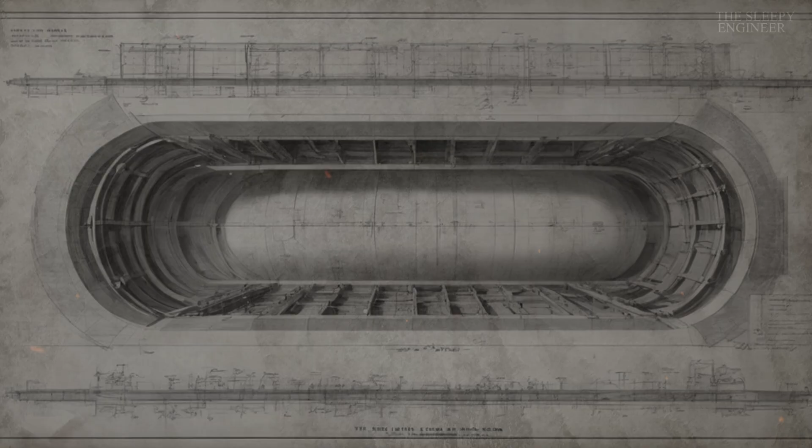The moment of connection is an act of sheer brute force elegance. The new segment is carefully guided by the winches and its own ballasting system until its steel bulkhead makes contact with the bulkhead of the segment that was previously laid at the bottom of the trench. Now the genius of the system is revealed. A series of powerful hydraulic rams on the new segment pull it firmly against the old one. Then a pump is activated which removes all the water from the small cofferdam-like space between the two steel bulkheads.

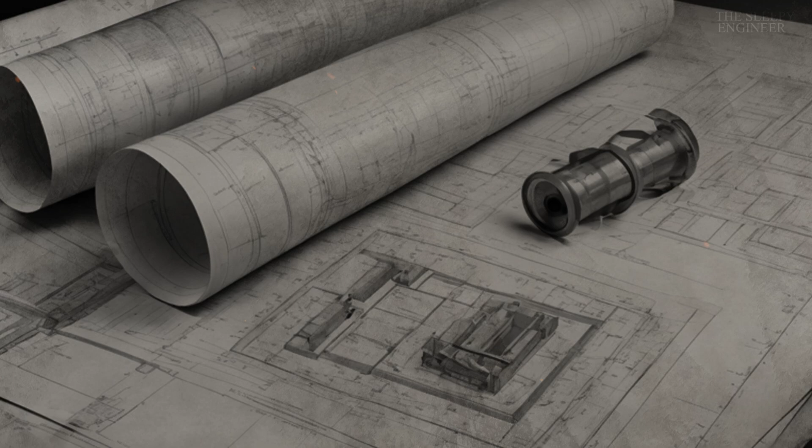As this water is removed, a colossal and invisible force is brought to bear. The full hydrostatic pressure of the river or sea above, a force of thousands of tons, now pushes on the back of the new segment, driving it forward with immense power. This force compresses the massive rubber Gina gasket with such intensity that it creates a perfect, immediate, and incredibly durable waterproof seal. The two segments are now one, joined by the invisible hand of the water's own immense weight.

The tunnel is now a series of connected watertight boxes, resting in a trench on the riverbed, but it is not yet a permanent part of the landscape. The final major step is to lock it into place by backfilling the trench.

A different kind of vessel now comes to the site, one designed to carefully place material back onto the riverbed. A layer of sand is often placed first, filling the gaps beneath the curved bottom of the tunnel and its flat gravel bed, ensuring it is perfectly supported. Then the main backfill material, often the originally dredged material or new rock and sand, is carefully placed back into the trench, covering the sides and the top of the tunnel segments until the entire structure is completely buried.

This protective layer of backfill serves two crucial purposes. It provides the final immense weight that locks the tunnel firmly in place and prevents it from moving, and it protects the structure from any potential future damage, such as from a ship's anchor or the scouring action of the river's currents, effectively restoring the riverbed to its original state.

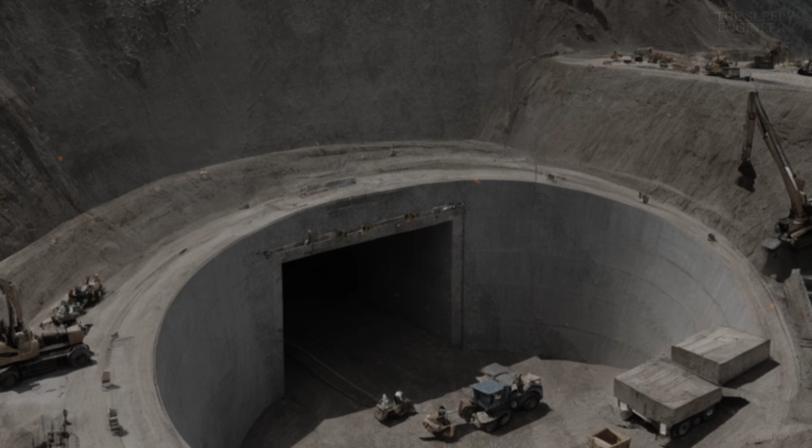The key to this paradox lies in understanding how a buried structure behaves differently from one on the surface. A skyscraper, an antenna, or a bridge, when struck by the seismic waves of an earthquake, is subjected to immense inertial forces. The ground moves violently beneath it, but the structure's own mass, its inertia, resists this movement, causing it to whip back and forth with destructive intensity.

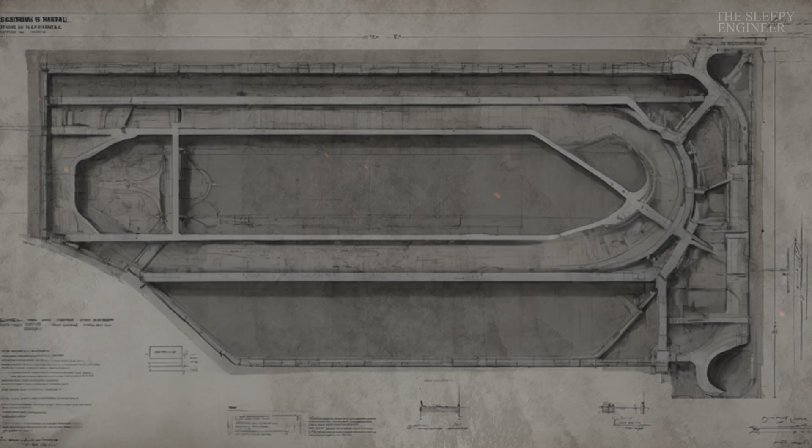A tunnel, however, being completely encased by the ground, has very little freedom to move independently. It is, for the most part, forced to move in concert with the surrounding rock and soil. This phenomenon, known as kinematic interaction, means that the primary stress on a tunnel during an earthquake is not from violent shaking, but from the strain of the ground itself deforming around it. The tunnel is stretched, squeezed, and bent along with the Earth. Therefore, the primary goal of seismic tunnel design is not to create a structure of infinite strength to resist the shaking, but to create one of exceptional toughness and flexibility to survive the stretching.

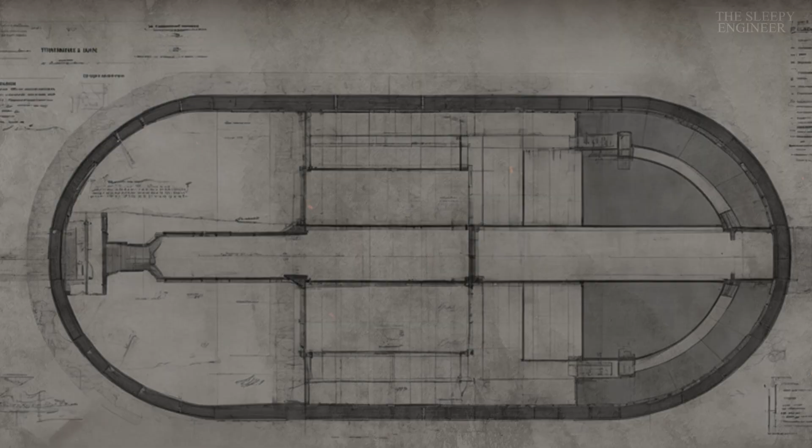The real dangers to a tunnel in an earthquake, then, are not what one might first imagine. The most catastrophic failures are typically caused not by the seismic waves themselves, but by the ground failures that these waves can trigger. In areas with soft, water-saturated sandy soils, the intense shaking can cause a terrifying phenomenon known as liquefaction. The soil instantaneously loses all of its strength and begins to behave like a dense fluid. A tunnel, being a hollow and relatively buoyant structure, can be forced to float upwards through this liquefied ground, breaking apart and rising to the surface.

The single most severe and almost indefensible threat is direct fault displacement, where a tunnel happens to cross an active fault line that ruptures, causing the two sides of the tunnel to be sheared apart by several meters in an instant.

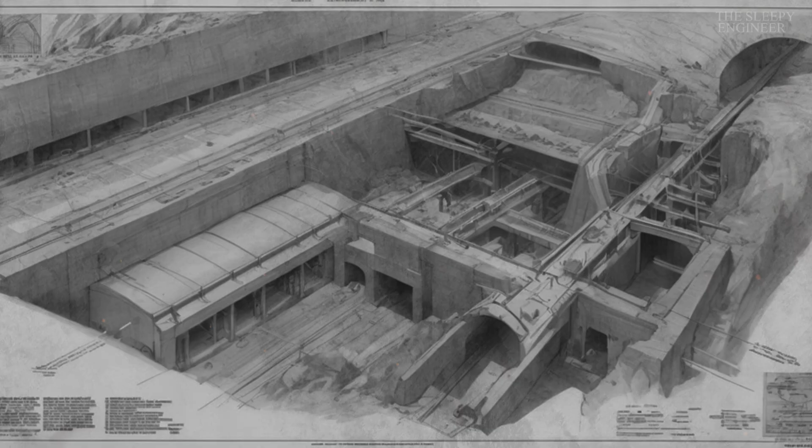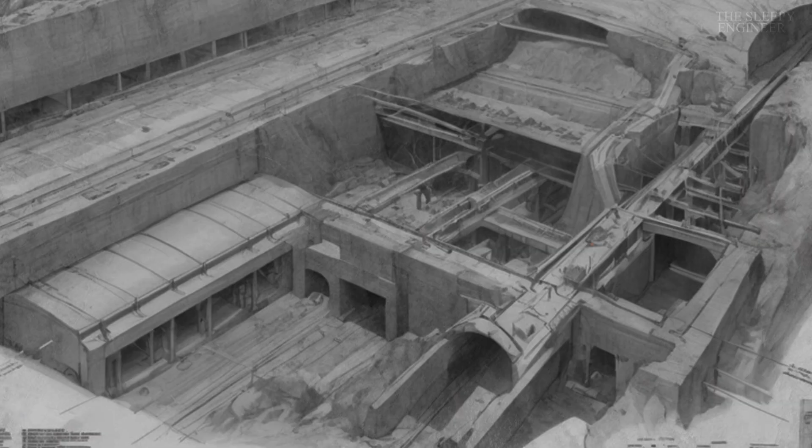At the tunnel's portals, the entrances and exits, the shaking can trigger immense landslides on the surrounding hillsides, burying the openings under thousands of tons of rock and soil. And where a tunnel passes from a section of solid bedrock into a section of soft soil, the two materials will respond to the seismic waves very differently, creating immense stress and a potential shearing point at this geological boundary.

The first and most fundamental line of defense against these forces is built directly into the tunnel's primary lining, into the very DNA of its concrete and steel. The key engineering principle is ductility, the ability of a material to deform and stretch under extreme stress without suffering a brittle failure. The goal is to create a lining that can bend and absorb an immense amount of energy before it breaks. This is achieved through the meticulous design of the steel reinforcement within the concrete.

In seismic zones, engineers will specify the use of special, high ductility steel rebar which is designed to yield and stretch significantly, acting like a tough internal webbing that holds the concrete together even after it has cracked. In recent decades, this has been augmented by the use of steel fiber reinforced concrete. In this method, thousands of tiny hair-like steel fibers are mixed directly into the concrete, creating a composite material with incredible toughness. These microscopic fibers act as a three-dimensional net, bridging any cracks that form and preventing them from propagating, thus allowing the structure to absorb the earthquake's energy without shattering.

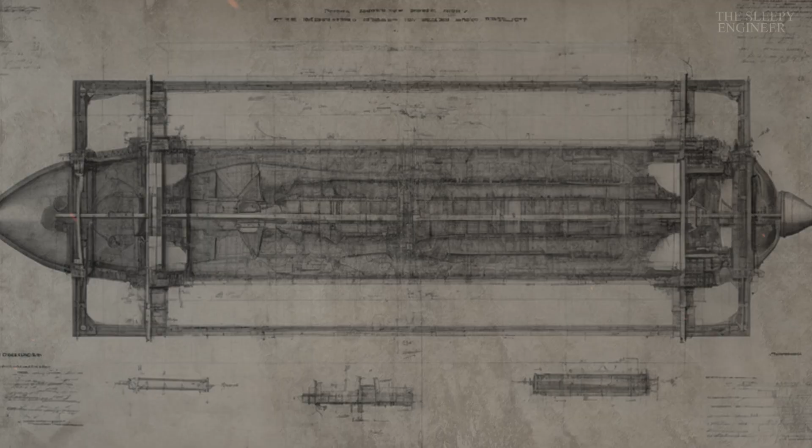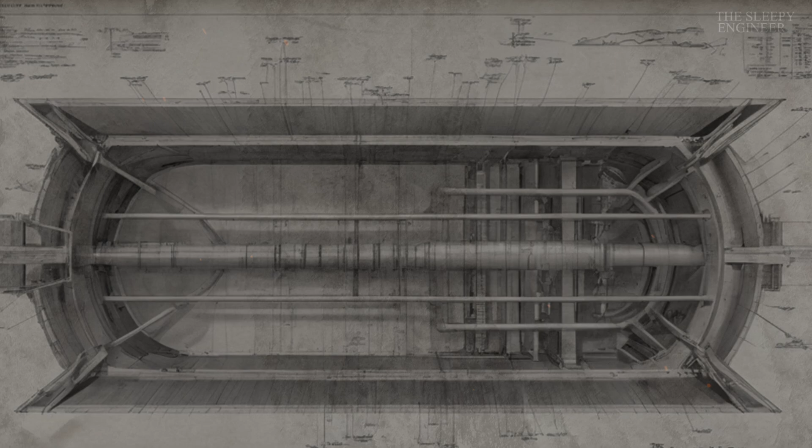The ultimate challenge, however, is when a tunnel has no choice but to cross a known and active geological fault line. This is a problem that cannot be solved by simple flexibility. It requires a solution of profound ingenuity and planned sacrifice. For these critical crossings, engineers will design and build a special, sacrificial section of the tunnel. This often takes the form of a much larger, oversized concrete box or cavern that is constructed around the tunnel at the precise point of the fault.

Inside this cavern, the tunnel itself is not a continuous, rigid tube. Instead, it is designed as a series of nested, sliding steel collars, like the sections of a telescope, or as a highly flexible, bellows-like structure capable of compressing, extending, and shearing by several meters without breaking its internal seal. This entire flexible joint is then often packed in a soft, crushable, and energy-absorbing material. The entire design is a pre-planned point of failure. When the earthquake strikes and the fault ruptures, this special section is designed to be destroyed, absorbing the immense shearing movement of the earth and sacrificing itself to protect the integrity of the main tunnel on either side from a catastrophic breach.

Immersed tube tunnels, resting in the soft silts of a riverbed, require their own unique set of seismic solutions to prevent them from being torn apart by the differential movement of the ground. The primary tool here is base isolation, a principle that seeks to decouple the structure from the most violent motions of the earth. This is achieved by making the connections between the massive sunken tube segments flexible. These joints are often sealed with colossal, specially designed rubber elements, sometimes called gaskets or seismic joints, which are capable of safely accommodating large deformations, allowing the segments to move independently without losing their watertight seal.

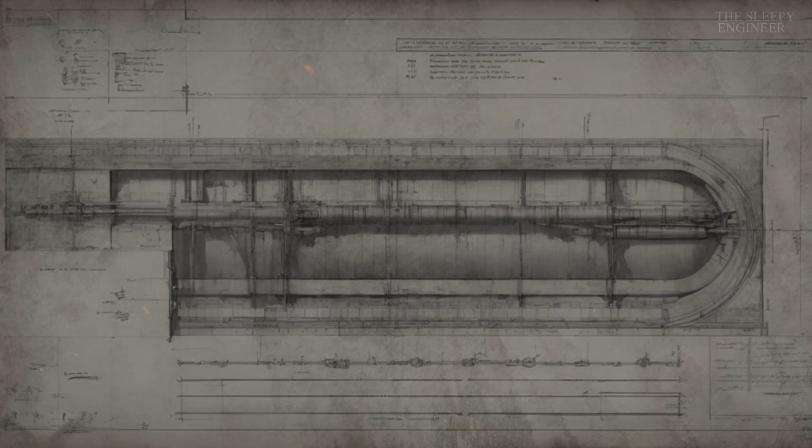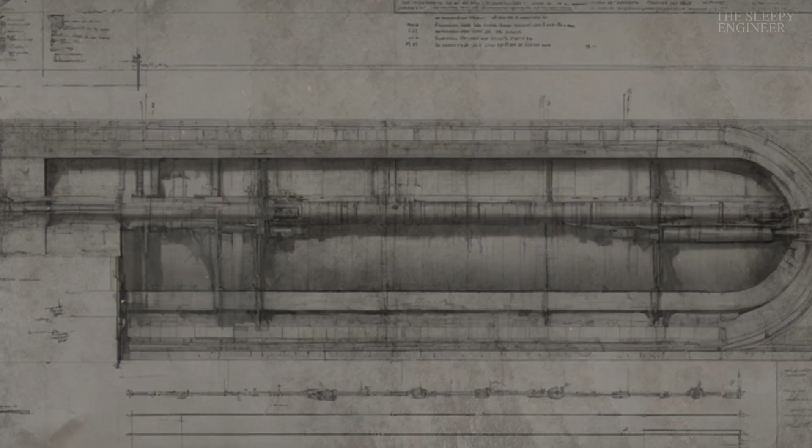The critical connection between the end of the immersed tube section and the land-based approach structures is another point of extreme vulnerability. These junctions are often designed with massive sliding bearings and flexible seals, creating a sort of structural fuse that allows the two distinct parts of the tunnel to move independently by several feet, ensuring that the powerful shaking of the land-based structure is not violently transferred to the more fragile tube resting in the soft riverbed soils.

The final layer of protection in the modern seismic tunnel is not structural, but informational. In many seismically active regions, tunnels are now integrated into sophisticated earthquake early warning systems.

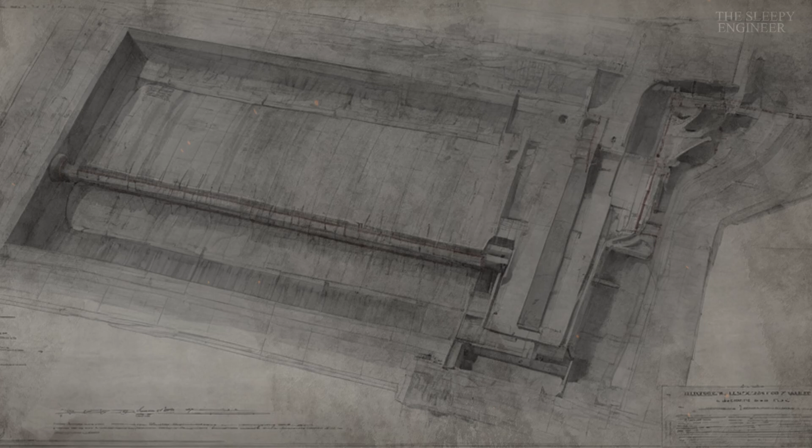These systems rely on a wide network of seismometers that can detect the first non-destructive energy waves that travel outwards from an earthquake's epicenter, known as P waves. These P waves travel much faster than the more destructive shearing S waves. This provides a precious warning, ranging from a few seconds to over a minute, depending on the distance from the epicenter. All trains within the tunnel can be automatically brought to a controlled stop.

All entrance portals can be closed to traffic with lighted barriers. The ventilation systems can switch to their maximum emergency mode, and an alert can be sent to local emergency services. This transforms the tunnel from a passive structure that must simply endure the earthquake into an active and intelligent system that can sense the danger coming and take steps to protect the lives of those within it.

By embracing the principle of flexibility over rigidity, by meticulously designing for ductility, and by creating ingenious sacrificial limbs to protect the heart of the structure, engineers can now build subterranean passages that can withstand the most violent and convulsive outbursts of the planet itself. The tunnel has evolved from an isolated object into a complex system, a structure that is deeply integrated with the very geology and seismology of its location.

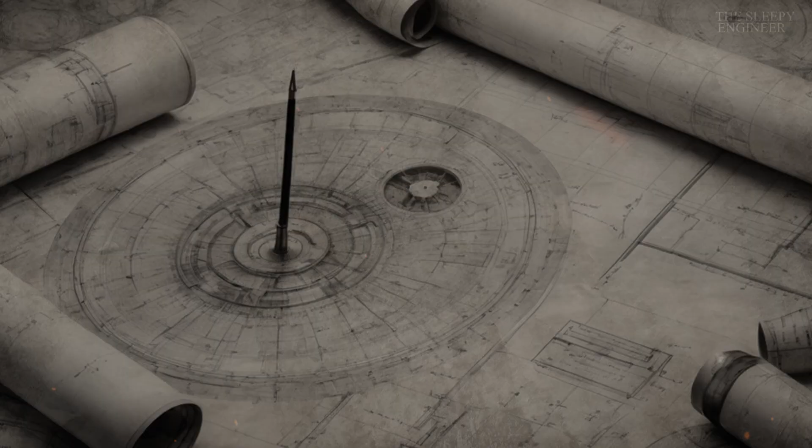But tunnels face threats that are not only from the natural world outside, but from the very purpose for which they are built, and the traffic that they carry. Of all the operational dangers that a tunnel faces in its daily life, the most terrifying and the most challenging from an engineering perspective is a catastrophic fire. How do you manage the unique and terrifying physics of a fire in a long, enclosed tube? How do you control the rapid spread of smoke, evacuate potentially thousands of people, and give firefighters a chance to battle a blaze in one of the most hostile and dangerous environments imaginable?

Having been designed and constructed to withstand the immense and violent convulsions of the planet itself, the modern tunnel must now face a threat that is not external, but internal. It is a danger born from the very traffic and purpose for which it was built. Of all the operational hazards a tunnel faces in its long life, none is more feared, nor more furiously engineered against, than a catastrophic fire.

A fire in a long, enclosed and linear tube is a fundamentally different and far more terrifying beast than a fire in the open air. The confined geometry of the tunnel acts like the barrel of a cannon, transforming a simple vehicle fire into a fast-moving, superheated, and toxic inferno. The heat, unable to dissipate into the open sky, is channeled along the tunnel's ceiling, creating a rapidly advancing layer of superheated gas that can reach temperatures of over 1,000 degrees Celsius.

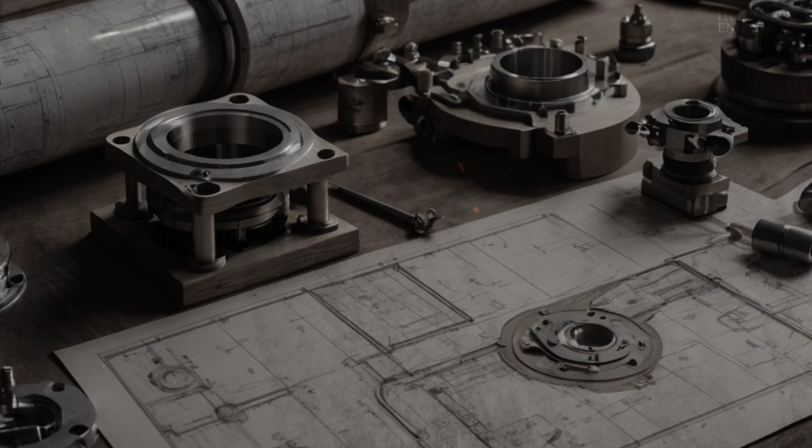Once a fire is detected, an immediate and powerful counterattack is launched against its deadliest weapon, the smoke. This is the primary role of the tunnel's ventilation system, a colossal set of lungs designed to manipulate the air with immense force. In many road and rail tunnels, this is achieved through longitudinal ventilation: a series of massive jet fans, resembling the engines of a modern aircraft, are mounted at intervals along the tunnel's ceiling. Within seconds of a fire alarm, a pre-programmed logic, based on the precise location of the fire and the current traffic flow, will activate these fans.

They roar to life, creating a powerful one-way wind, a controlled gale that flows along the length of the tunnel. The goal of this critical wind is to push all the smoke and superheated gases in a single, predetermined direction, away from the traffic and people who are trapped upstream of the fire. This creates a clear, smoke-free path behind the fire, allowing for a safe and organized evacuation, and providing a clear point of access for the arriving firefighters.

For very long, complex, or bidirectional tunnels, a more sophisticated transverse or semi-transverse system may be used, which employs a separate, full-length ventilation duct, often hidden in a void above the ceiling, allowing smoke to be extracted directly from the location of the fire, while fresh air is simultaneously supplied to the zones on either side, creating a more controlled and balanced atmospheric environment.

While the ventilation system fights to create a breathable atmosphere, the second critical priority is to guide the people within the tunnel to safety. This is the science of egress and evacuation. The design of a modern tunnel is a master class in human psychology and crowd control under extreme duress. Emergency walkways are provided along the sides of the tunnel, physically separated from the traffic lanes. The primary path to safety, however, is not necessarily towards the tunnel's exit, which may be kilometers away.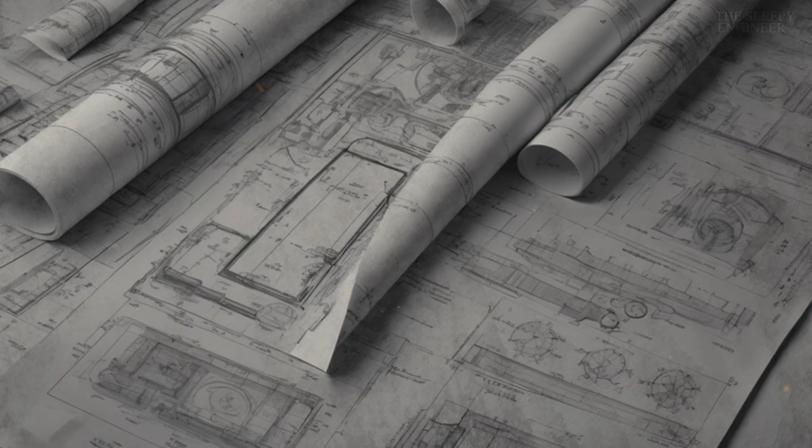A severe tunnel fire, with temperatures that can exceed that of a blast furnace, poses a direct threat not just to life, but to the structure of the tunnel itself. Concrete, while non-combustible, can be severely damaged by extreme heat. The moisture trapped within the concrete can turn to steam, creating immense internal pressure that causes the surface to violently flake and explode off, a phenomenon known as spalling. This can expose the steel reinforcement within to the fire, which can cause it to lose its strength, leading to a potential structural collapse.

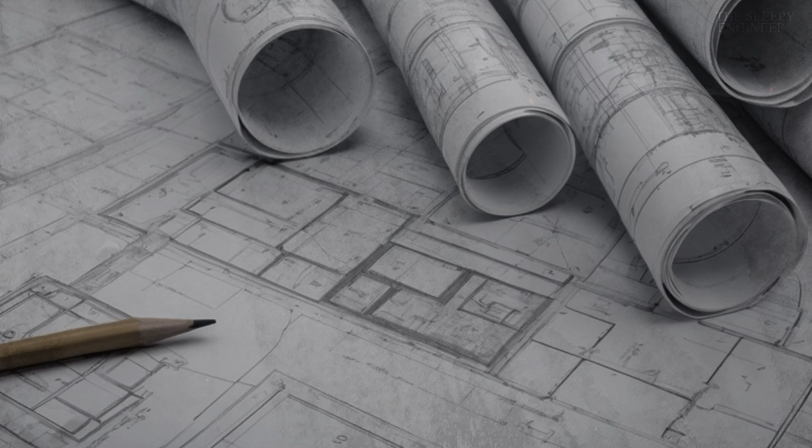To prevent this, the tunnel's inner lining is often protected by a final layer of passive fire protection. This can take the form of fire-resistant boards or a thick, insulating, sprayed-on coating that is designed to shield the structural concrete from the fire's heat for a period of several hours. An even more ingenious solution involves mixing a small amount of fine polypropylene fibers directly into the concrete itself. When the concrete is subjected to intense heat, these thousands of tiny plastic fibers simply melt away, creating a microscopic network of interconnected channels through which the trapped water vapor can safely escape, preventing the explosive pressure buildup and preserving the integrity of the structure.

Through this comprehensive, multi-layered, and redundant system of intelligent detection, powerful and strategic ventilation, clear and protected paths of evacuation, and robust structural resilience, the modern tunnel is transformed from what could be a terrifying death trap into a highly controlled and ultimately survivable environment. The complex and expensive engineering of life safety is now considered to be just as vital, if not more so, than the engineering of the primary structure itself.

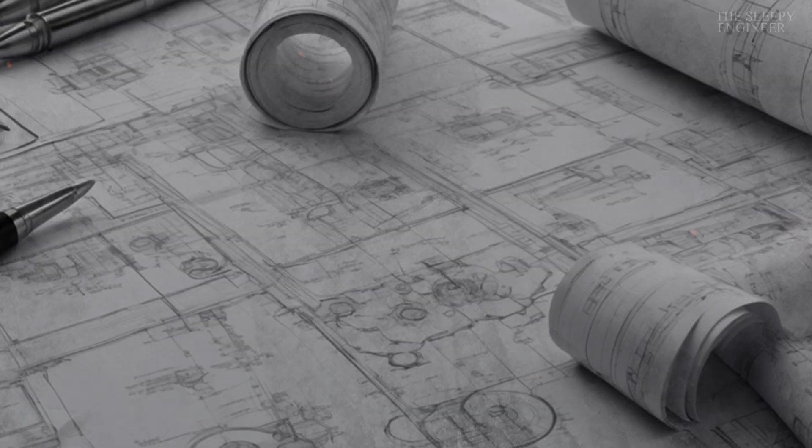We have now journeyed from the initial deep investigation of the Earth to the final meticulous outfitting of the tunnel for safe human use. But all of this technology, all of this investment, and all of this risk is for nothing if the tunnel does not last for its intended 100-year lifespan. How do engineers fight the slow, relentless, and eternal enemies of any man-made structure? How do they combat the insidious, constant creep of groundwater, the slow chemical decay of materials, and the simple, grinding wear and tear of a century of continuous use? This leads us to the final quiet and perpetual phase of a tunnel's life, the world of inspection, maintenance, and the unending war against time.

The breakthrough of the TBM and the final outfitting of the tunnel are not the end of the story. They are merely the end of the beginning. A tunnel, once open to traffic, is born into a state of perpetual slow-motion warfare. Its completion marks the start of a new, silent, and unending conflict fought on a timescale of decades and centuries. The enemies in this war are the most fundamental and relentless forces in nature. The insidious and constant pressure of groundwater, the slow, invisible creep of chemical decay, the grinding wear and tear of millions of passing vehicles, and the simple, inescapable force of entropy.

A tunnel is not a static monument like a pyramid, designed to simply exist. It is a dynamic, high-performance piece of infrastructure that must be constantly monitored, maintained, and defended against the forces that are perpetually trying to reclaim the void from which it was carved. The engineering of a tunnel's construction is a sprint. The engineering of its maintenance is a marathon that never ends. The most persistent and dangerous of all its adversaries is water. The subterranean world is a wet world, and the groundwater that saturates the earth is a patient and powerful foe.

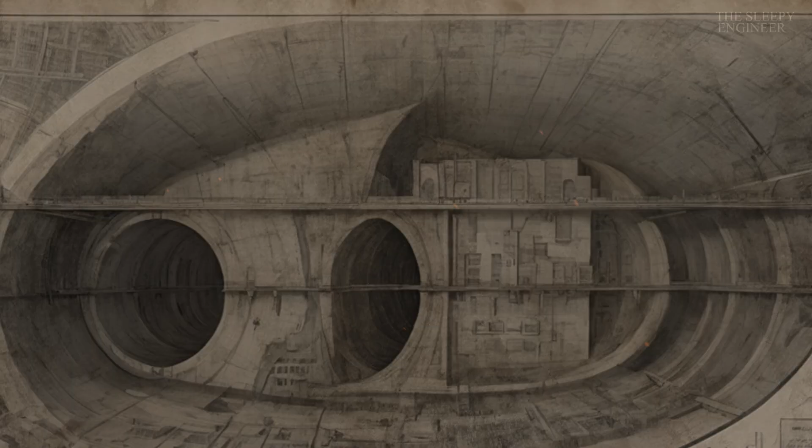But the most important event in a tunnel's health regime is the principal inspection, a deep and comprehensive examination that occurs every 5 to 10 years. For this, the tunnel is often closed to traffic, and a team of specialist engineers will use a variety of tools to get within arm's reach of every square meter of its surface.

They use specialized inspection vehicles with articulated arms and hydraulic platforms to sound the concrete with hammers, listening for the hollow drum-like sound that indicates a hidden void or delamination behind the surface. They use non-destructive testing techniques, such as ultrasonic sensors and ground-penetrating radar, to peer inside the concrete itself, searching for hidden corrosion or water intrusion that is not yet visible to the naked eye.

When a leak or a defect is found, the response is swift and precise. For the common problem of water ingress through a crack, the primary repair technique is injection grouting. This is a highly specialized process where the repair crew drills a series of small holes or ports directly into the crack. A specialized water-reactive polyurethane resin is then injected into these ports under high pressure.

This resin is a marvel of material science. It is hydrophilic, meaning it actively attracts water, and it is formulated to aggressively seek out any moisture present in the crack. When it comes into contact with this water, it undergoes a rapid chemical reaction, expanding to many times its original volume and curing into a tough, flexible, and completely waterproof foam-like plug.

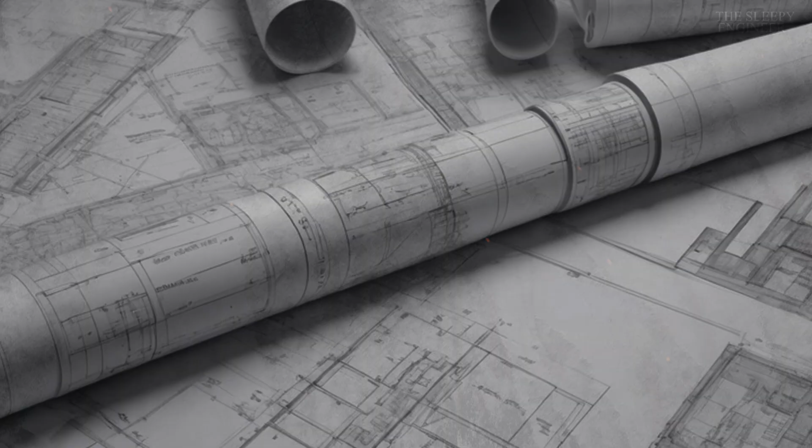As our technology advances, so too does our ability to monitor the health of these hidden structures. The future of tunnel inspection lies in the world of robotics and artificial intelligence, a move away from periodic human inspection towards a state of constant automated surveillance. Engineering firms are now developing autonomous robotic platforms, wheeled or tracked vehicles that can patrol the tunnel during off-peak hours without the need for human supervision.

These robotic sentinels can be equipped with a vast and powerful array of sensors. High-resolution cameras capture a continuous visual record of the tunnel walls, while powerful laser scanners create a perfect three-dimensional digital model, a point cloud of the entire structure with sub-millimeter accuracy.

By comparing the point cloud from one patrol to the next, sophisticated AI software can automatically detect any new cracks, any spalling of the concrete, or any deformation in the tunnel's shape that might be invisible to the human eye. This allows for the creation of a living, evolving digital twin of the tunnel, a virtual model that reflects the real-world condition of the structure with unprecedented accuracy and detail.

Over the span of its century-long life, a tunnel will inevitably require more than just minor repairs. It will need a major overhaul, a comprehensive rehabilitation to extend its life and bring it up to modern standards. These projects are immense undertakings in their own right, often requiring long-term closures and costing hundreds of millions of dollars.

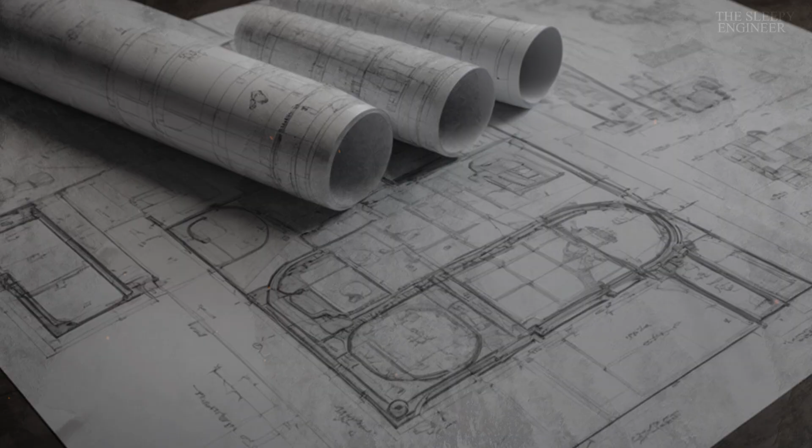It means the careful selection of materials, such as the use of stainless steel or epoxy-coated rebar in the most exposed areas, or the formulation of high-performance, low-permeability concrete mixes. These choices may increase the initial construction cost, but they pay for themselves many times over by reducing the need for costly and disruptive repairs in the future, a recognition that the battle for longevity is best fought with foresight.

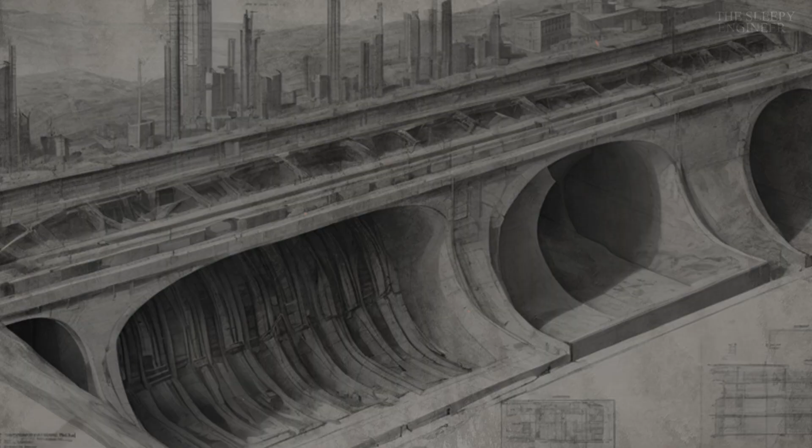By embracing this comprehensive philosophy of perpetual vigilance, of constant and technologically advanced inspection, of proactive and precise repair, and of designing for a long and serviceable life from the very beginning, engineers can ensure that these colossal and expensive structures can fulfill their promise of a century or more of continuous, safe, and reliable service. The tunnel, therefore, is never truly finished. It is a living entity, a dynamic system that must be constantly monitored, cared for, and healed to survive its unending and quiet war against the relentless forces of decay.

We have now explored the full life of the tunnel, from its conception in the mind of a planner to its violent birth in the deep earth, and through its long life of service and maintenance. But our story has so far focused on the great passages that move us horizontally. What of the tunnels that move us vertically? How do we conquer the unique and immense challenge of creating the deep, complex, and often multi-level station caverns, ventilation shafts, and elevator shafts that are the vital nodes connecting our surface world to the growing subterranean network below?

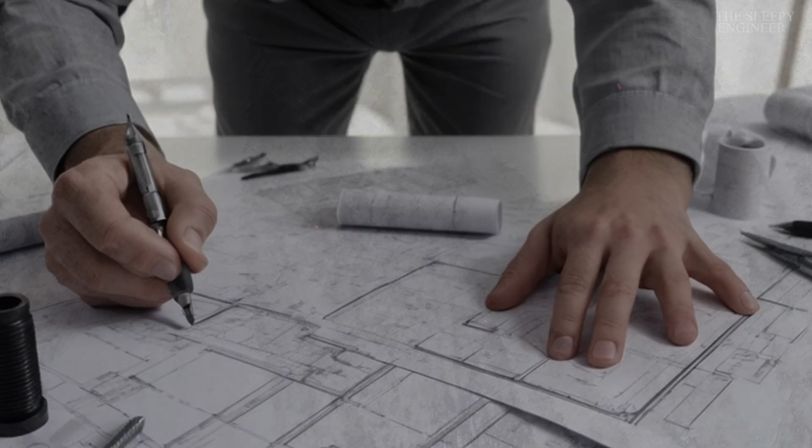We have journeyed for many kilometers along the great horizontal arteries of the subterranean world, following the relentless advance of the tunnel boring machine and the patient sculptural craft of the sequential excavation method. But these arteries, no matter how long or how deep, are inert and useless without a connection to the world of the surface. They require a heart to pump life into them, and vital organs to connect them to the city above. These are the vertical shafts and the great station caverns, the third and perhaps most complex dimension of the underground realm. The construction of these deep, large volume, and often multi-level spaces represents a challenge that is in many ways greater than that of the tunnels themselves.

To create a stable, permanent, and massive void in a single location, often directly beneath the foundations of the city's most important structures, is to concentrate all the risks and all the geological pressures of tunneling into one single critical point. This is the world of vertical engineering, the art of conquering not the journey but the destination. The most fundamental element of this vertical world is the shaft, a deep and cylindrical passage that serves as the elevator, the ventilation duct, and the primary point of access to the deep tunnels below.

The methods for sinking a shaft are as varied as the ground conditions they must conquer. In stable rock, the process can be a conventional one, a cyclical process of drilling and blasting a few meters of rock at a time, mucking out the debris, and then lining the newly exposed section with a permanent, cast-in-place concrete wall. But in the soft, weak, and waterlogged soils that lie beneath most major cities, this open-face method is impossible. Here, engineers must employ more ingenious and powerful techniques.

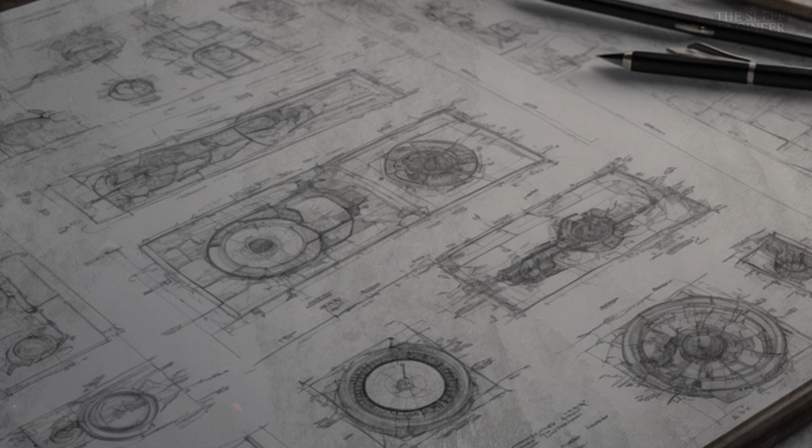But then, the brilliant inversion of logic occurs. Before any major excavation begins, the massive reinforced concrete slab that will form the station's permanent roof is cast directly on top of the ground at street level. Once this roof has cured, the surface can be immediately restored, the road can be repaved, the utilities reconnected, and the traffic of the city can resume its normal flow, with the public completely unaware of the colossal project that is just beginning beneath them.

Through openings left in this new roof, a fleet of small excavators and loaders is lowered, and they begin to dig out the earth in the space below the roof. When they have excavated down to the level of the station's next floor, the concourse level, they stop, and the concrete slab for that floor is cast. This process is repeated, level by descending level. Excavate the soil down to the next floor, then construct that floor until the entire multi-level station cavern has been built from the top down, a process of hollowing out a building from within, all while the city carries on undisturbed.

When a station is simply too deep to be reached from the surface, or when the disruption of any surface level construction is completely unacceptable, engineers must return to the sculptural philosophy of the New Austrian Tunneling Method. These deep-mined stations are some of the most impressive feats of all subterranean construction. They are created entirely from within the earth, often through the existing running tunnels that have been bored by a TBM. The process begins with the excavation of a series of small parallel pilot tunnels, or adits, which are carefully driven to form the outline of the future cavern's crown.

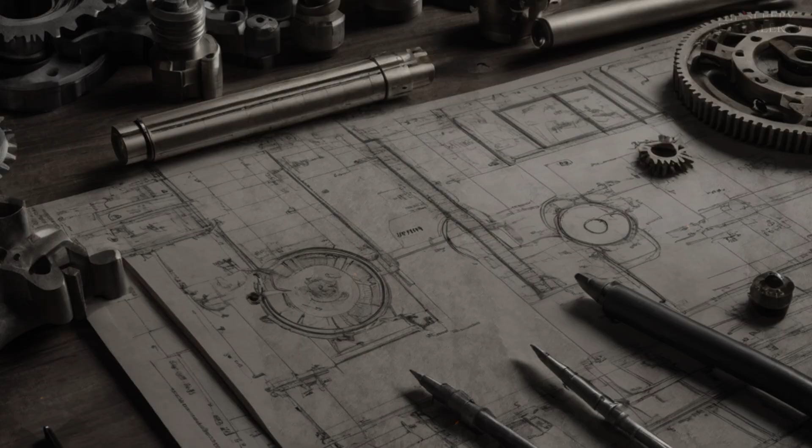These initial small openings are immediately supported with shotcrete and rock bolts. Then, in a highly controlled and meticulously planned sequence, the pillars of rock between these pilot tunnels are carefully removed, allowing the small openings to be progressively and safely enlarged. The arch of the crown is slowly and methodically revealed and immediately supported, a process of gradually and carefully expanding the void, always ensuring that the ground's natural, self-supporting arch is mobilized and reinforced.

This sequential enlargement continues downwards, with the excavation of the benches and the invert, until the final, colossal, and architecturally expressive shape of the station cavern has been sculpted from the solid rock hundreds of meters below the surface, without ever breaking ground.

One of the most delicate and high-stakes operations in all of tunneling is the moment of intersection, when the linear path of the TBM must meet the great static void of the station cavern. A tunnel boring machine cannot simply run into a solid concrete wall. The arrival must be a carefully choreographed and prepared event. The specific section of the station's diaphragm wall where the TBM is scheduled to arrive is specially designed and constructed.

This area, known as a soft eye, is built not with traditional high-strength steel rebar, but with a special, weaker concrete that is reinforced with fiberglass bars. This creates a section of wall that is strong enough to hold back the earth during the station's excavation, but soft enough to be easily and safely excavated by the TBM's cutter head without causing significant damage to the cutting tools.

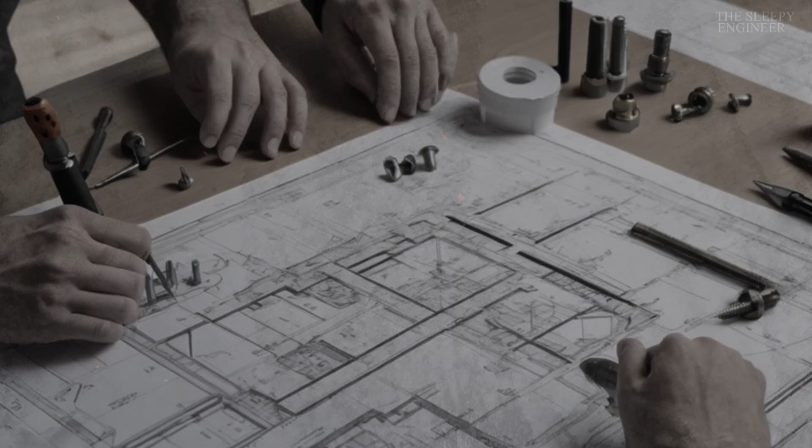Furthermore, a massive, flexible, and watertight rubber gasket, a docking seal, is cast into the concrete wall around the perimeter of this soft eye. As the TBM makes its final approach, it pushes its shield forward until it makes firm and perfect contact with this seal, ensuring that at the moment of breakthrough, there is no possibility of a sudden and catastrophic inrush of groundwater and soil into the station.

The deep station cavern is a destination, and its primary purpose is to move people vertically between this new subterranean world and the surface. This requires its own specialized form of vertical engineering. The immense open voids of the station are crisscrossed by the longest and most powerful escalators ever built, complex machines that must operate reliably for decades in a demanding underground environment.

The installation of these multi-ton, long-span machines within the complex geometry of the station is a major construction project in its own right. For the very deepest stations, high-speed, high-capacity elevators are required. This necessitates the construction of their own dedicated vertical shafts, which must be perfectly plumb and aligned, and which come with their own unique and complex challenges of ventilation, pressurization, and fire safety.

The engineering of this vertical transportation is the vital link in the chain, the system that transforms a deep, isolated cavern from a simple piece of infrastructure into a living, breathing, and functional part of the city's transit network.

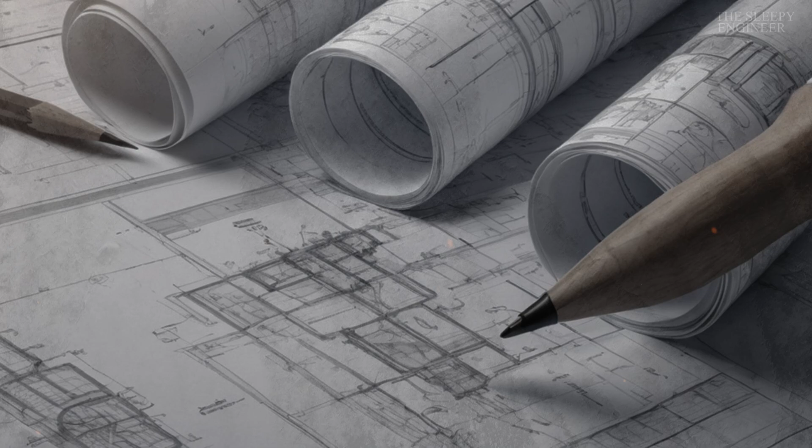What are the next great leaps in tunneling technology? What are the most ambitious and mind-bending underground projects currently being imagined and built around the world? And what does our ever-growing and irreversible reliance on this hidden realm tell us about the future of our cities and indeed of our civilization?

We have journeyed together into the deep earth through the complex and ingenious methods that allow us to carve a new world beneath our old one. We now pull back from the immense detail of the present to gaze upon the horizon, to the future of this subterranean realm. The evolution of tunneling is far from over.

The next great leap will be into the realm of true automation, where tunnel boring machines guided by artificial intelligence will learn to sense and react to the geology ahead of them in real time, adjusting their speed, torque, and ground conditioning with a subtlety and speed that no human operator could ever match.

On the fringes of our research laboratories, we dream of even more radical technologies, of plasma torches and high-powered lasers that can vitrify and vaporize rock without touching it, of nanotechnology and bioengineering that could one day allow us to solidify and stabilize the Earth with microscopic machines. And the ambition of our projects will only grow.

Engineers today are seriously modeling the construction of intercontinental tunnels that could one day link continents, of vast automated underground networks to transport freight and relieve the pressure on our choked surface roads, and even of deep self-sustaining underground habitats, a final refuge from the growing pressures of a changing climate on the surface.